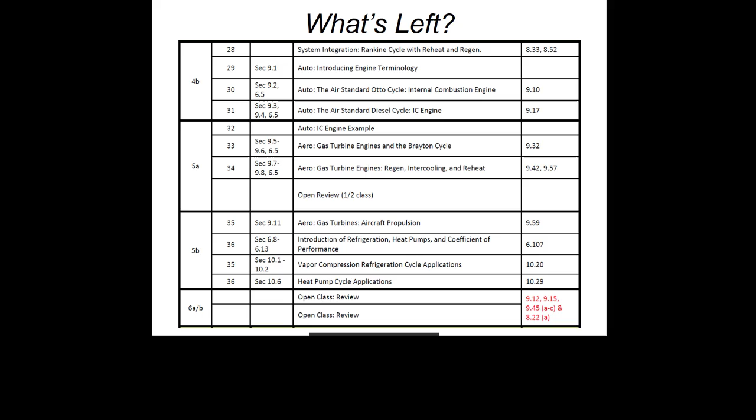So hopefully we'll get 1.5 or 2 of these evening sessions that are just problems like that. I think it'll be exciting for me—you get to play Stump the Chump over here. Again, the harder the question is, the better it is for all of us.

Now, in those open question-type problems—and hopefully even in the examples we do in class here, examples I've done before—you'll hopefully start to see the similarities in how I approach the problem, because I generally follow the same process, the same map. So the first thing I do when thinking about these cycle analysis problems—we've only really talked about Rankine cycles so far, but as we go to these different thermodynamic cycles, it's always going to be kind of the same things we're interested in.

Usually what we're trying to drive towards by the end is how do I characterize how well the cycle is doing. So there's some big characterization parameter. Now, all of these major characterization parameters, although sometimes we call it a thermal efficiency, sometimes we call it a coefficient of performance, but it's always going to be what's the energy benefit of the cycle divided by what's the energy cost of the cycle.

Now, when I look at the cycle, all of these thermodynamic cycles are a series of processes that are either run in series or, like that Rankine regeneration cycle, in parallel. So I got to ask myself, are these different processes open processes where mass is flowing through a system, stuff we're doing now on the second midterm, right? Or are they closed processes like we did on the first midterm?

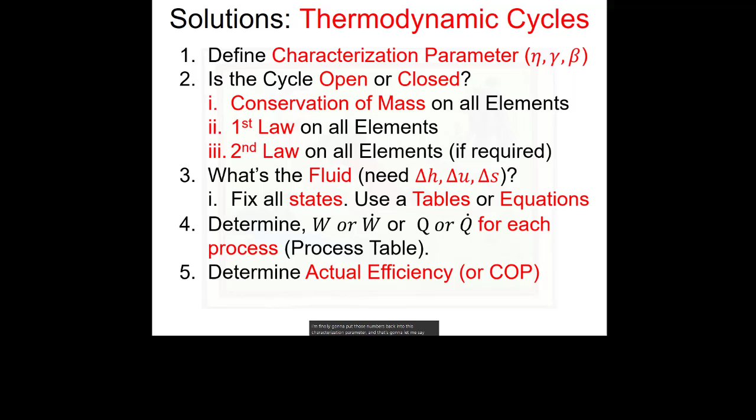Then I'm going to take the numbers that I have, I'm going to put them into the symbolic solutions that I had for the first and second law. That'll let me find things like work or power, heat or heat rates. And then I'm finally going to put those numbers back into this characterization parameter, and that's going to let me say something like, how efficient is my nuclear power plant?

And then sometimes I'll compare how efficient the real power plant is to how efficient the ideal version of the power plant is, by looking at that Carnot efficiency. Remember, that's related only to the hot and cold temperatures.

Now, so this is kind of my roadmap for how to do cycle analysis problems, but part of the reason that I like having a consistent process is because I don't like to memorize things. And even this is probably a little too much. It's like 5 points with a bunch of subpoints and stuff.

So really, I think for all of these cycles, there are 3 questions that I ask myself. The first is, how do I characterize the cycle? That's kind of 2 questions because it's basically asking me what's the energy benefit and what's the energy cost. So if it's a heat engine like a Rankine cycle, the energy benefit is mechanical power, or W dot net, and the energy cost is the heat that we have to put into the cycle.

The second question I ask myself is: is the system open or closed? Because that will let me start to develop the symbolic solutions I need to solve the problem. The last of the big 3 questions I ask myself is what's the fluid? Because if I know what the fluid is, that'll set out the rules I have for fixing the states, for finding things like H, U, S, and specific volume. The neat thing is that for all the different cycles we'll talk about, even though it's the same general process to solve the problems, the answers to these 3 questions have different permutations for each cycle we look at.

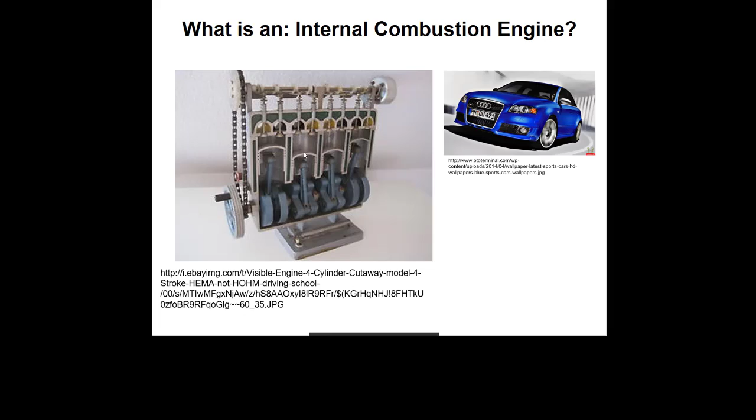Sometimes it's in a car that maybe you're driving back and forth to work, but sometimes it's in a big truck. Maybe we're learning more about trucks than we ever wanted to know, as we can't get anything from anywhere with regularity these days, or at least it feels that way, because trucks bring pretty much everything that we use everywhere that we are - it's part of the supply chain.

So when we think about it thermodynamically, what's the energy benefit of an automobile? Automobiles replaced horses, which replaced human power. The reason internal combustion engines are used for the most part is because they're producing mechanical power - you step down on the gas and the wheels turn. So you're getting that spinning shaft, which turns the wheel, which propels your vehicle forward or backward. We're trying to develop power or work with this internal combustion engine. In that way, it's kind of like a Rankine cycle, because the energy benefit of a Rankine cycle was to develop power.

Everybody is talking about the cost of an internal combustion engine these days. The biggest ongoing cost of an automobile is the cost to fuel it up. We put liquid gasoline into most automobiles, but not all these days. We do that because inside an internal combustion engine, we burn that fuel in a controlled way, and that gives us heat. Just like a Rankine cycle, this internal combustion engine trades heat, obtained from burning a fossil fuel, for mechanical work or power. So an internal combustion engine is still a heat engine.

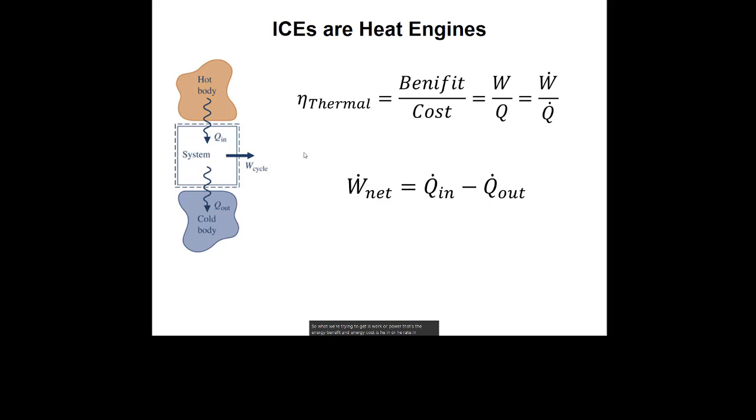When we think about our three big questions about cycles, the first one is, how do I characterize the cycle? An internal combustion engine is characterized the same way as a Rankine cycle, because it's a heat engine. What we're trying to get is work or power, that's the energy benefit. And the energy cost is heat in, or heat rate in, depending on whether we're talking about elapsed time or rate versions of these equations. So this part is just like a Rankine cycle.

But when we talk about our three big questions, that's where the similarities end. So what's the difference between this internal combustion engine, this piston cylinder assembly that keeps going around and around, and this Rankine cycle where water keeps going around and around, going through these phase changes? The similarity is that they're both heat engines, doing that same energy transaction of turning heat into mechanical work.

The first difference, and we'll see that for internal combustion engines this isn't exactly true, is the model we're going to use, the cartoon of the internal combustion engine to understand how it works. We'll assume that all the thermodynamic processes happening in this internal combustion engine are closed system processes, so that mass is not entering or leaving our system. That's different from the Rankine cycle, because the Rankine cycle is a bit like an assembly line.

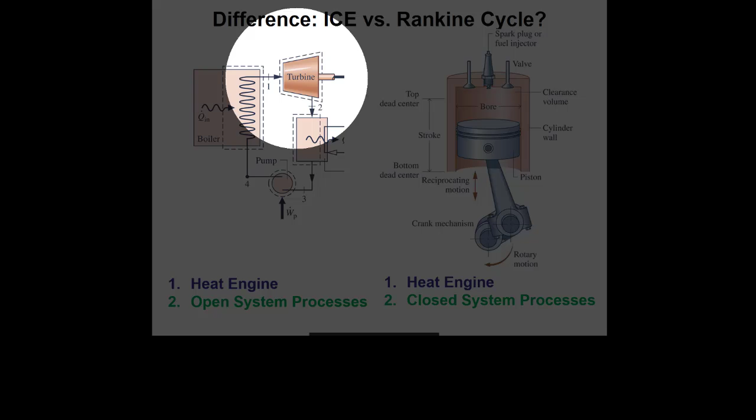We're developing power, we do that in the turbine. But then we go to the condenser, that's where we lose our heat. Then we go to the pump, that's where we put work in. Then we go to the boiler, that's where we put heat in. And we just keep doing it over and over again.

So in the internal combustion engines we'll talk about, they do those same four processes, but they all happen in the same place. The way we're going to model this engine is as if it's a closed system, that there's air inside this piston cylinder assembly. No new air comes in, no new air goes out. We'll see that's not exactly true, but it helps us solve problems with a pencil and paper.

That would give us our symbolic solutions for things like work and heat, which we need for our thermal efficiency. The next question is, how do I get numbers to put into those symbolic solutions? I need to know what the fluid is. For a Rankine cycle it was usually water, although you could get lower power systems using something like a refrigerant, something that's boiling and condensing. But for an internal combustion engine, and we'll see this isn't exactly true either, the assumption we're going to make is that the working fluid is air or some other ideal gas, but generally air.

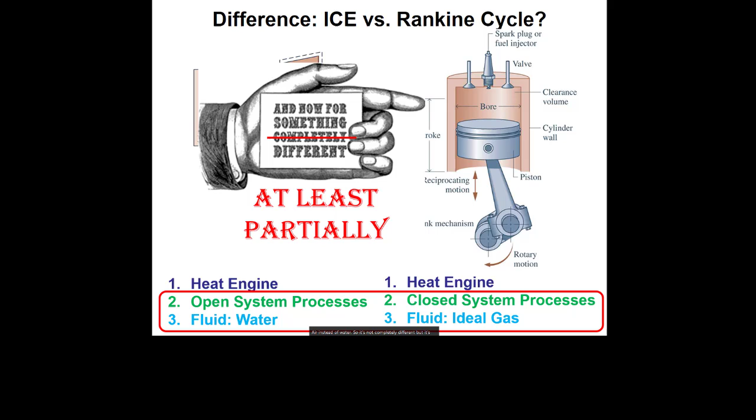So even though they're both heat engines, when we think about these three questions, this is as far away from a Rankine cycle as you could get and still be a heat engine. Because it's still a heat engine, we characterize it the same way. But the way we get symbolic solutions is different because we'll use a different version of the first law. And the way we fix the states will be different because it's air instead of water. So it's not completely different, but it's mostly different, or partially different, even though it's doing the same job.

So this is when we start to introduce terms. This is my very crude drawing of a piston cylinder assembly, my PowerPoint art on full display. The first thing is, this is the cylinder, this part here, and this is the piston. The piston is the part that goes up and down.

I like this animation, so you're going to get to see this one a bunch. If we think about the piston moving up and down, its lowest position we call bottom dead center, because you want your piston centered in your cylinder, and it's the bottom of the travel it has. The top position, the uppermost position of the piston, is top dead center. Notice that top dead center isn't having the top part of the piston flush with the top part of the cylinder, that there's some clearance between top dead center and the very top of our cylinder.

Now, the distance of travel, the space between top dead center and bottom dead center, that length we call the stroke or the stroke length. So sometimes people talk about two-stroke and four-stroke engines. That means to do a whole cycle, there's two strokes going up and down, or four strokes up, down, up, down. Don't worry if you don't get that yet, we'll talk about it a little bit. So the stroke or stroke length is the length between bottom dead center and top dead center.

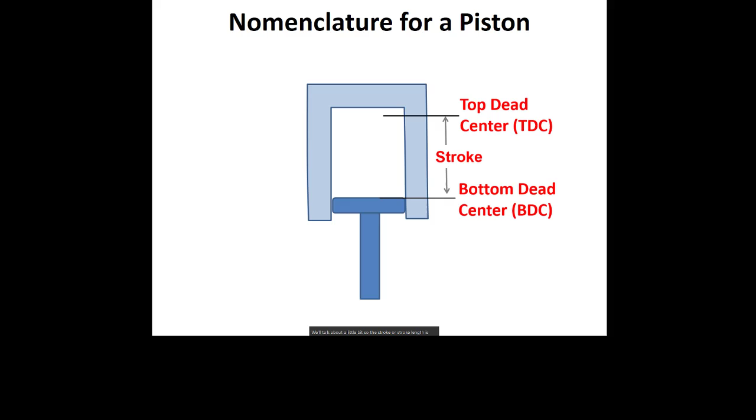We'll notice that this describes a volume, which we call the displacement volume. This cylinder is circular in cross section, so this displacement volume is a cylinder. If your exhaust valve is open and you pushed your piston up from bottom dead center to top dead center, this displacement volume is the volume of air that you would push out of your cylinder. That's the equivalent of the internal combustion engine breathing out, getting rid of that spent air fuel mixture inside the piston cylinder assembly.

But you've got to notice that just like top dead center isn't flush with the top of the cylinder, there's some volume here that's not displaced, that doesn't get pushed out of our piston cylinder assembly. So the displacement volume is not the entire volume at bottom dead center. It's the volume described by the stroke length and the diameter of the piston, or the cross-sectional area of the piston.

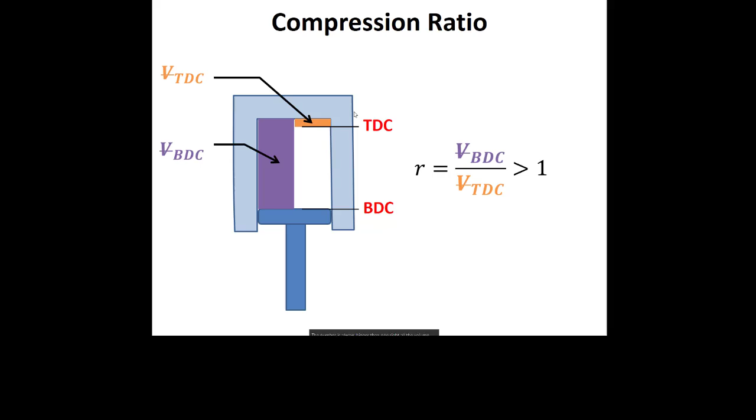Another thing that's important here is engine speed. Now, I know manual transmissions are kind of a dying breed, and as a mechanical engineer it hurts me to admit this, but I've never owned a car with a manual transmission. But it's really important to pay attention to what your engine speed is when you're changing gears manually.

It's kind of weird because engine speed isn't about how fast the piston is moving up and down, although it's kind of related to that. It's registered in RPM on your instrument cluster, because this piston is connected through a 4-bar linkage to a shaft that's spinning, and it's the rotational speed of that shaft telling you how fast your engine is going. Because the piston, as it moves up and down, has zero velocity at the top and bottom and some velocity in between. So instead, we talk about the angular velocity of the shaft driving this whole motion.

Now, because the units here are in rotations per minute, and if we're using the metric system we might want something like radians per second, we're going to need to know how to do some unit conversion.

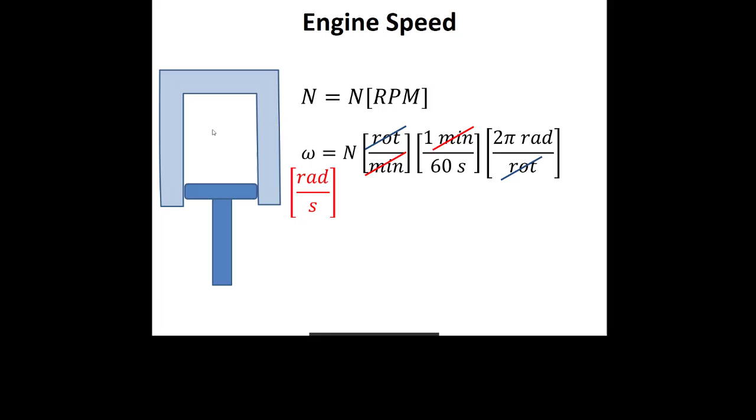So that's an important parameter when you're driving your vehicle. It's maybe not as important as the speedometer, because that's the one that determines whether or not you get a ticket. But knowing your engine speed can be important.

Now, depending on what your vehicle looks like, it might not even be a vehicle - you could have a 2-stroke engine or a 4-stroke engine. Remember we talked about stroke length? Here you can see the shaft - when we talk about rotations per minute, we're talking about how fast this shaft here is spinning. That tells us this rotational speed, and because this is a 4-bar, or what's it called?

Because it's a simple machine with a 4-bar. What did I just call it? A 4-bar mechanism? No, I can't even remember. Sometimes this is easier to describe when you're up at the board. We brought in a speaker once - I don't know if I've told you this story yet - but sometimes you feel like when you're standing at the board or giving a presentation, you're kind of in the zone of stupid because your brain just stops working every once in a while.

So this is a 4-bar linkage, and it's moving around, and this is kind of like a simple machine, a mechanical machine. Now, depending on the type of application your engine needs, it can be a 2-stroke engine or a 4-stroke engine. 2-stroke engines are usually kind of dirtier machines, but it's a cheaper kind of engine.

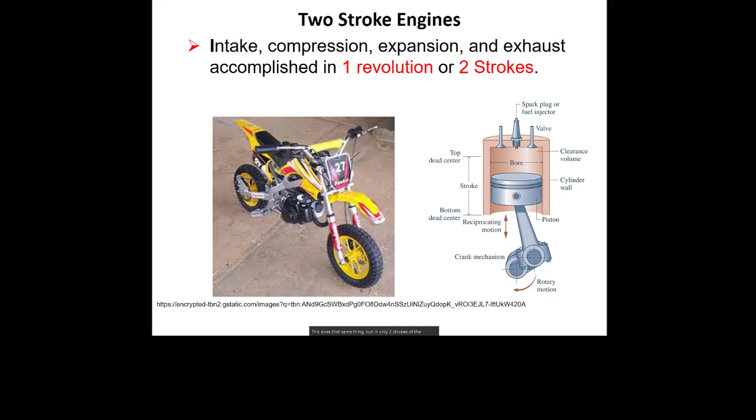But as your engine gets bigger - now you've got a motorcycle, or if you're driving like, I have a 4-cylinder Toyota Venza. I used to have a Toyota Corolla - they last forever, that's why I bought those cars. The Venza is like a station wagon, but you don't call it a station wagon anymore because that's not cool. But I'm starting to get rust on the bottom - my car's like 11 years old, and it's on the bottom of the lift gate, so I gotta get somebody to grind that out.

But as your power requirements get bigger, then you start to move into a 4-stroke engine, which is a more complicated machine, generally more expensive to build, but generally runs cleaner for these higher power applications.

Another way that we can characterize internal combustion engines is how we get the combustion - how are we burning the fuel? So in my 4-cylinder Toyota engines, there are spark plugs. What happens is, as there's this air-fuel mixture inside the piston cylinder assembly, and as that piston goes up, the pressure's going up, which means the temperature is going up, because PV is equal to MRT.

I got to start the fuel to burn because I want the fuel to burn, because that increases the temperature more, increases the pressure more, and makes that gas in the system want to push that piston down, which in turn is what's spinning that shaft.

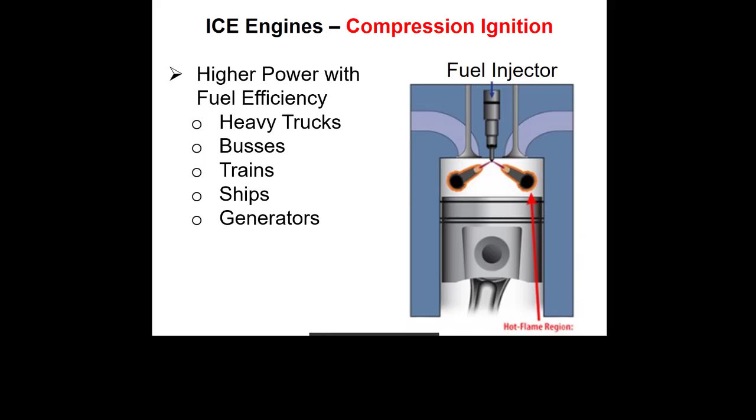So in North America, if you're not talking about something that uses compressed natural gas, or we're starting to move to electric now too, but usually heavy buses or heavy trucks, trains, a lot of ships - and if you have a diesel generator, because the power in Rochester is sometimes touch and go, so sometimes you need a generator to keep your fridge going if you lose power for a significant amount of time - these things often run on compression ignition.

And remember at the beginning I said, well, we make a lot of assumptions like it's always closed or it's always air. And part of the reason we make a lot of assumptions is because solving this would be really hard with pen and paper. So we're going to talk about, just like we did, what engineers do is we try to make things better using imperfect information, or cartoons of how the universe really works.

But here we'll talk about how a 4-stroke engine might run as it goes through a thermodynamic cycle. So we can think about the piston was at top dead center and now it's moving down to bottom dead center. So now we have, see, there's two valves here.

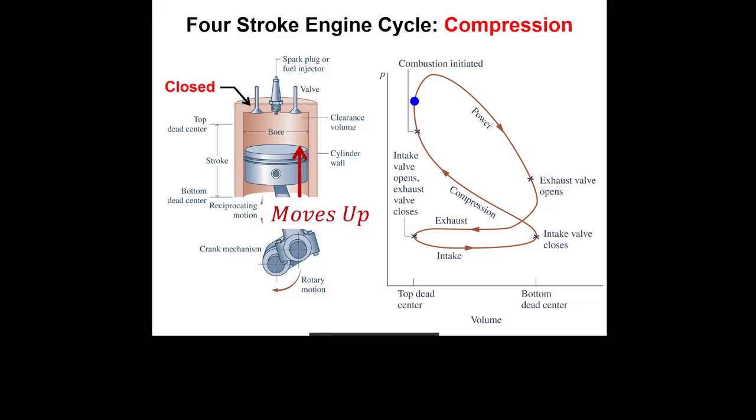What that means is my pressure goes up because I'm taking the same amount of air molecules and packing them into a smaller space. In real life, we don't just have air, we have this air-fuel mixture. As we're compressing, not only is the pressure going up, but the temperature is going up too.

And then we get to this magic spot where, if it's a spark ignition engine, that spark plug goes off, and now we get this rapid burn of the fuel in the air-fuel mixture. That drives the temperature up, drives the pressure up. And because the pressure is high, there's this big force on the piston that wants it to go down.

So that drives the piston down. Now this is our third stroke, the equivalent of the turbine inside the Rankine cycle. This is the whole reason we're running the internal combustion engine, to get to this stroke. This is the power stroke, where we're getting that mechanical power out. The whole rest of the cycle is just to get to this moment, so that we can drive that piston face down, produce force, and that's what's turning this shaft.

Ultimately it's doing a lot of things in your vehicle, but one of those things is making the wheels turn. But now, once we get back to bottom dead center again, because we burned the fuel in our air-fuel mixture, we converted some oxygen and some hydrocarbon fuel into carbon dioxide, probably some carbon monoxide, hopefully not that much, maybe some nitrous oxides too, hopefully not that much, but we consumed some oxygen. So we can't just keep running this with the same mass in the cylinder, because things don't burn when there's no oxygen.

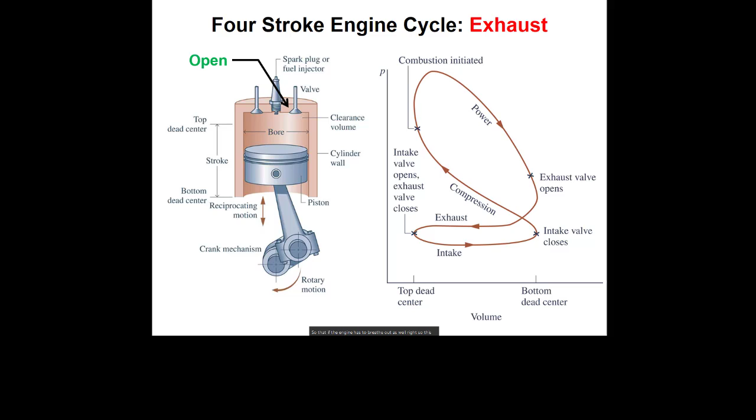The biggest volume. We open up our exhaust valve, and now the piston moves up, and as it moves up, because the exhaust valve is open, the pressure stays approximately constant because now there's some place for the air to go. We get rid of that exhaust gas, it goes out your tailpipe, before we start everything again. So now with that exhaust valve open and the piston moving up, we're pushing out this spent air-fuel mixture so that we can get back to where we started.

And then what would happen is after this exhaust valve closes, the intake valve opens, the piston moves down again, and we breathe fresh air back into the engine, and we just keep going around and around. And that's how a 4-stroke internal combustion engine works.

And the neat thing about something like this cutaway is a 4-cylinder engine. These cylinders are in line. Sometimes they'll talk about, especially as you get more cylinders, like a 6-cylinder engine, a V6, so the pistons aren't in line, but they're in a V shape. But here they're in line. And even though these two pistons are at the same place and these two pistons are at the same place, each cylinder here is in a different stroke.

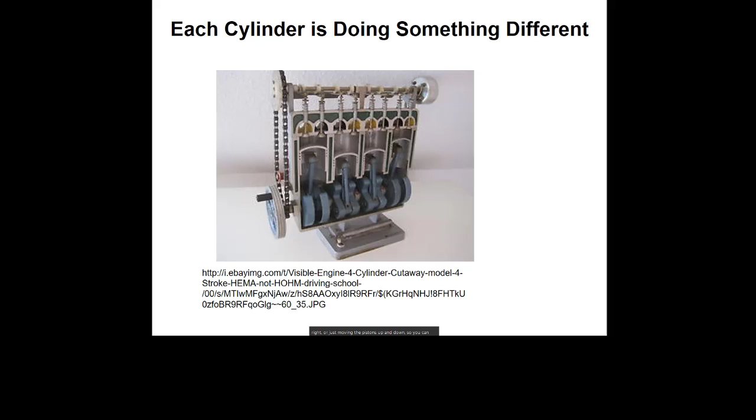Now, hopefully from this discussion, you get the idea that this is a pretty complicated thermodynamic cycle. If you were going to try to solve this thing without making a whole bunch of assumptions, I don't think you could do it with a pencil and paper, certainly not in the half hour we give you for an exam problem.

The cycle is not adiabatic, heat transfer is important here. There's combustion, which we don't talk about chemical reactions in this class. Because there's combustion, the actual composition of the gas is changing. So if you were thinking about it from an ideal gas law perspective, the specific gas constant of the gas is changing because it's a different gas, or a different composition of gases. Kinetic energy can be important here, even though we often neglect kinetic energy in our analyses so far.

It's not at steady state. It's transient, right? So the piston is always moving up and down. Things are changing with time. Sometimes it's an open system, which means we would sometimes use some version of the first law. And other times it's a closed system. When both of those valves are closed, then it's a closed system, and we'd use a different version of the first law for that.

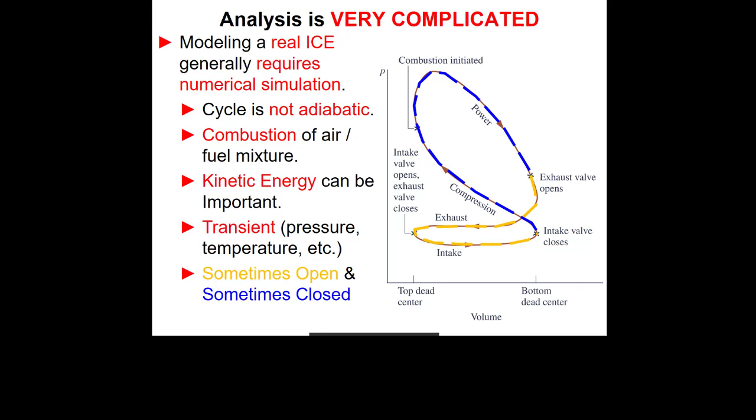So in order to get to a place where we can understand what's going on with these engines, we're going to have to make a lot of assumptions. Remember that each assumption kind of brings us more into a cartoon than real life, but that doesn't mean it's not useful, that we can't make something or make something better, even though the models are more simplistic than the real universe.

So we'll often do what we call an air standard analysis. That sort of is a broad term that encompasses a whole bunch of assumptions we're going to make here. We're going to neglect combustion. We're going to pretend that inside the cylinder is not this air-fuel mixture that sometimes is unspent, sometimes is spent, sometimes is going through the process of burning the fuel.

We're going to assume that the system is always closed. So instead of combustion, we're just going to talk about some heat coming in and some heat going out. We're going to say that the system is always closed. Remember that means delta E is equal to Q minus W instead of dE by dt is equal to a whole bunch of stuff.

We're going to say that all processes are ideal inside the engine, right? That it's reversible, a totally reversible process. Obviously this is not the case, but it still helps us get to usable information.

This sort of goes with the fact that we're neglecting combustion, but we're going to assume that the working fluid is always just air, that there's never any fuel in it, whether it's combusted or not, right?

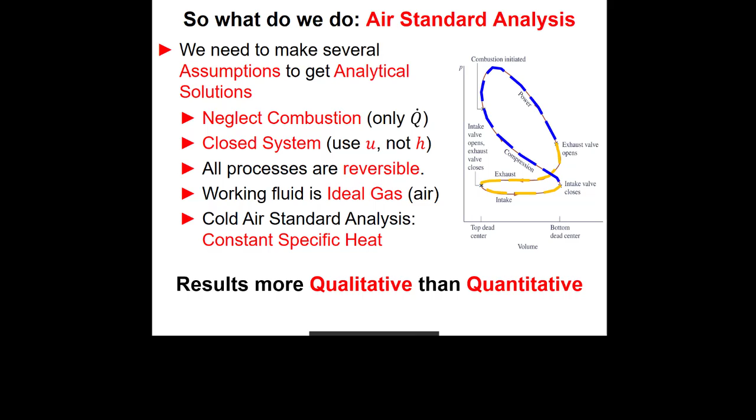Because of this, we can't necessarily have a lot of trust in the number that we get, but it's still going to tell us some really important things about what happens to the power or the efficiency of the engine if I do something like change the compression ratio. Remember, the compression ratio was the biggest volume divided by the smallest volume, or the volume at bottom dead center divided by the volume at top dead center. So we can still get some qualitative information about how to change the performance even by using this analysis, which is relatively simple. Remember, simple doesn't mean easy, just means less complicated than the real thing.

Another way that we can characterize an engine is by talking about its mean effective pressure. Remember how in the first third of the class we talked about how for closed systems, work can be calculated as the integral of PdV, but if the pressure was constant, then you'd pull it out and you'd get work is equal to some constant pressure times the change in volume.

So this is kind of where this idea for mean effective pressure comes from. You get the net work of one cycle in your system, and you divide it by your displacement volume, which again is the volume at bottom dead center minus the volume at top dead center. I mean, I guess the engine is probably at this pressure at some point, but it's not really supposed to represent some physical pressure inside the engine. It's just some way of comparing two different engines. So you know that if you have the same engine speed, but your engine has a higher mean effective pressure, that means you're going to get more net work or more power out of your engine.

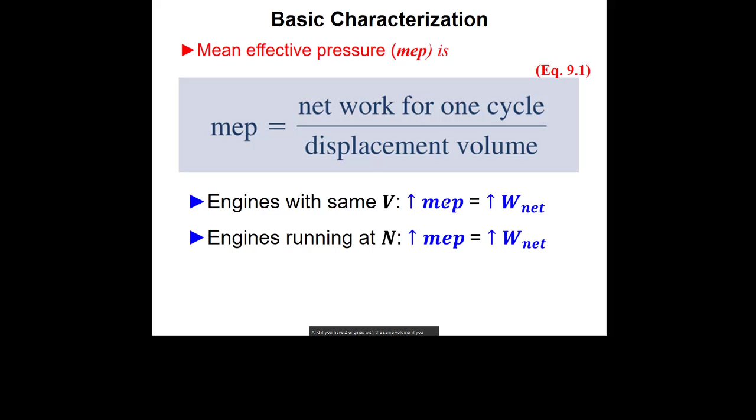If you're running at the same engine speed, then more mean effective pressure means more work or more power. And if you have two engines with the same volume, if you have a bigger mean effective pressure, then you get higher work out of that engine as well.

Still, when we talk about heat engines, which an internal combustion engine is, the way we characterize this, our first big question, is how do I characterize the cycle? Because it's a heat engine, we talk about thermal efficiency, and it's always energy benefit over energy cost. The energy benefit is work. The energy cost is heat in.

Or it's net power over heat rate in. I can think of the net power as the heat rate in minus the heat rate out, or I can think about the net work as heat in minus heat out. So how do I go about finding work and heat?

The answer is, as is so often the case in thermodynamics, use the first law. But because the system is closed, that's one of the assumptions we're making when running these internal combustion engine cycles, the system is always closed. That means I'm back to this picture of the universe, where the change in the energy in the system, or after I make assumptions about kinetic and potential energy, the change in the internal energy in the system is equal to the heat that comes in minus the work that goes out.

And if this was the first third of the class, I would tell you that we get heat using the first law, we get work by integrating P dV, and we get delta U by looking stuff up in the textbook.

Thermal efficiency can be, because these are closed systems, we're not often talking about powers and heat rates, we're back to talking about works and heats. I can talk about work out plus work in - remember, work out is positive, work in is negative - divided by heat in. Or I can divide all those things by mass and get the lowercase version of those variables. We'll talk about how to get powers and heat rates, and I can use those same equations.

So how do I find work and heat? The nice thing is, at least for one of the internal combustion engine cycles we'll talk about, we can assume that most of the processes are simple systems. Remember, simple doesn't mean easy, it means less complicated. In a simple system or simple process, thermodynamically, it means we either have heat or work, but not both. So if the process is adiabatic, then I can cancel out my heat transfer term.

And I'll get that work is the change in the internal energy, or work over mass is the change in the specific internal energy.

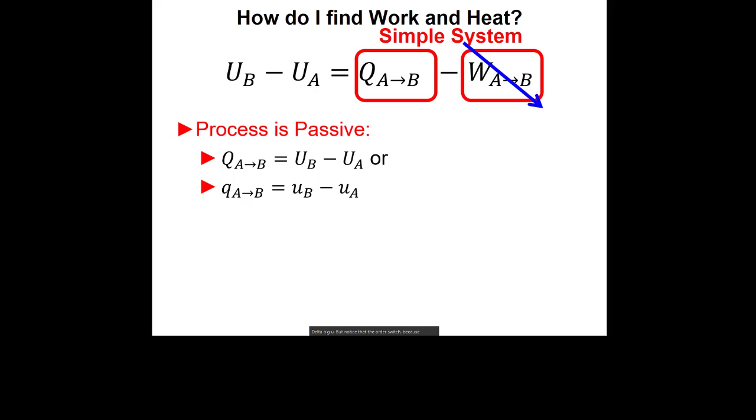Or if I'm going to say that a process is passive, one where I'm assuming there's heat transfer happening but not work, then heat transfer is equal to, again, delta big U, but notice the order switched because Q is positive and it's minus W in this equation. So I have U at the end minus U at the beginning.

Now we get to this point when I have these equations where I've got to ask myself, what's the fluid? Because now I need numbers for delta U. And the fluid, when we're talking about internal combustion engines, is going to be air, or some other ideal gas, but you're driving your car around in air, so the intake is air and the exhaust is mostly air.

So that opens up for us the ideal gas law. Sometimes, particularly if we're trying to find mass, we're going to have to use pressure times volume is equal to mass times the specific gas constant, which is the universal gas constant divided by the molar mass, times the temperature, not a delta T, so that's Kelvin or Rankine. If I'm trying to find the mass, I'm stuck using that equation. Remember, the units are going to be tricky when I do that.

But if I'm moving between states, I will often prefer to use PV over T at state 1 is equal to M times R, but it's a closed system, so the mass is constant, and I assume there's no combustion, so the specific gas constant stays the same. So PV over T at state 1 is going to be equal to PV over T at state 2. Again, remember those temperatures have to be absolute temperatures. Really, anytime you're dealing with an ideal gas law problem, just reflexively turn those temperatures into Kelvin or Rankine.

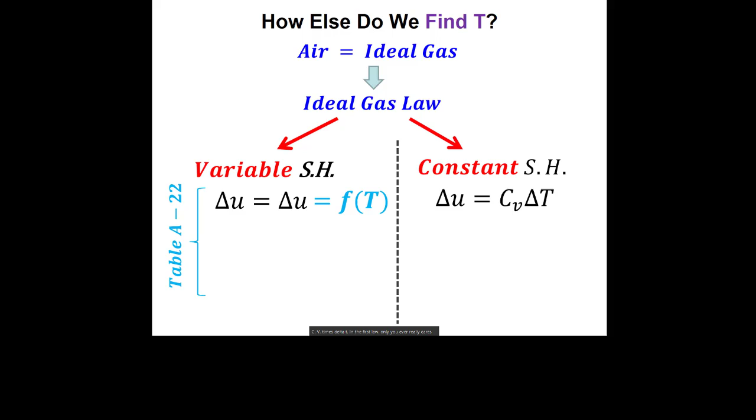If it's constant specific heat, I'll never actually find the individual specific internal energies, which is fine because I don't really care what they are, since I'm going to assume that delta U is equal to CV times delta T. The first law only ever really cares about the change in internal energy or specific internal energy.

Now, this is going to be true for any cycle where the working fluid is an ideal gas. We need to know which of our processes are isentropic. Those are going to be the ones where there's no heat transfer and it's ideal. The nice thing about internal combustion engine problems is every process is ideal, so we're really just looking for ones where there's no heat transfer and only work. Those are going to be isentropic.

Now, we talked a little bit about using variable specific heat to fix the states, that I only need one piece of information on that table. We'll do an example like this today. If I can find a VR value or a T value, then I can fix the state. So the ratio of volumes is going to be equal to the ratio of this VR value that's on table A22.

But if it's constant specific heat and it's isentropic, I'm looking for some equation that has K in the exponent. You'll notice for both of these isentropic relationships, we're using the relationships that have volumes in them. That's because these are closed systems, and in closed systems, we typically know volume ratios.

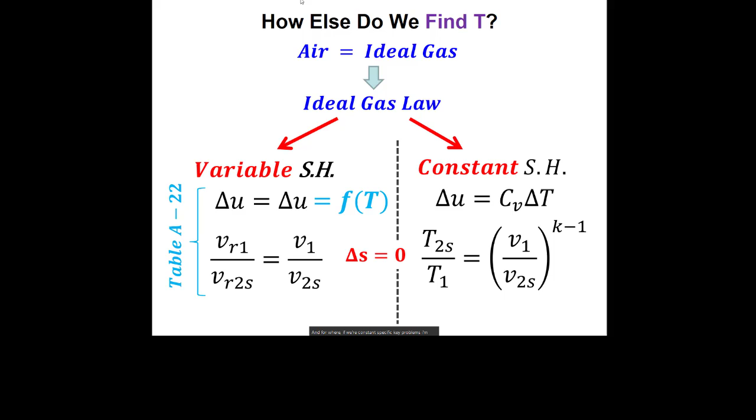So I like the equation sheet that I made. I think you can still make your own equation sheet, but bring mine too. So there's three different ways we're going to model internal combustion engines.

Well, really only two, because we don't really do dual cycles. The difference between an Otto cycle, which we'll learn first—I think it's the less complicated version—and the diesel cycle, which we'll learn second and is more complicated, we'll try to do both today. It's the assumption we make when we're adding heat that's different. An Otto cycle is more like a spark ignition engine. We're going to assume that when we add heat, it happens almost instantaneously, so fast that the volume doesn't change.

So Otto cycles happen at constant volume. Diesel cycles, the assumption that we make when we're adding heat is that they happen at constant pressure. And we'll see that makes it a little bit harder to solve diesel problems.

And then in the textbook, it talks about dual cycle problems. This is more complicated, which probably means more realistic. Usually as you increase complexity, you get closer to the real life application. Here we assume that the heat addition process can be broken down into two parts, one that's constant volume and one that's constant pressure. But we're going to focus on Otto and diesel cycles for the remainder of the day, and that's what we'll talk about for internal combustion engines.

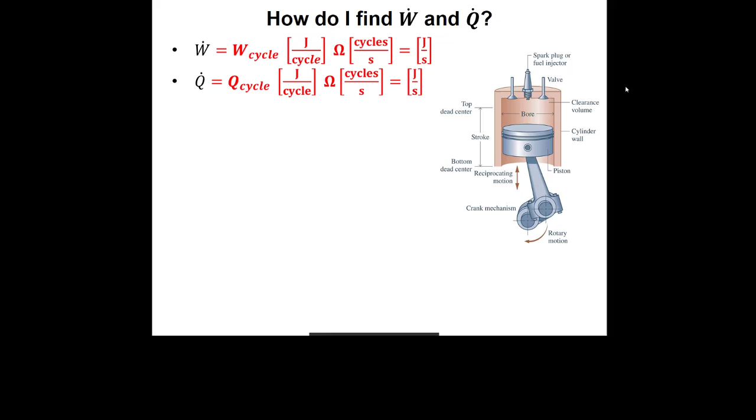Same thing if I wanted the heat rate, I would find heat per cycle multiplied by cycles per second, and that would give me joules per second. But how do I change engine speed, which is in rotations per minute, into this cycles per second value?

The thing that I need to know is not just the engine speed, but whether it's a 2-stroke or a 4-stroke engine. Because for every rotation of our crankshaft, we get 2 strokes. If we started at bottom dead center, the first half rotation would get us to top dead center, and the second half rotation would get us back to bottom dead center. So we're back to the same position in the same phase - not thermodynamically, but phase meaning same direction.

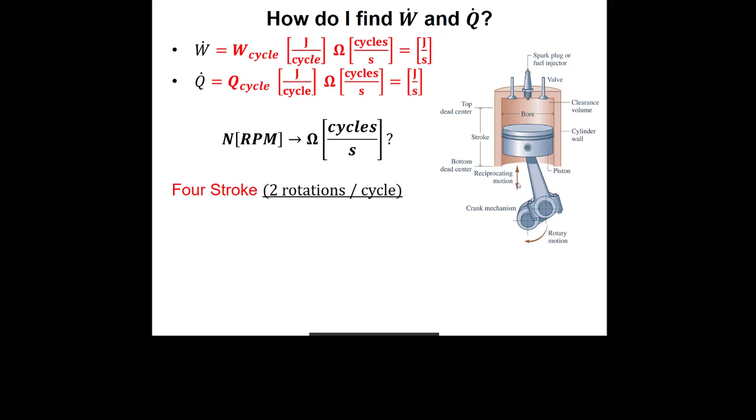So a 4-stroke engine, to get 4 strokes to go up, down, I need 2 rotations per cycle. So if I'm trying to find out how many cycles per second I have in a 4-stroke engine, I have to take my rotations per minute, turn that into rotations per second, and then divide the number of cycles I have by 2 rotations, because it takes 2 full rotations to get 1 cycle in a 4-stroke engine - to go 4 strokes, I need 2 rotations of that crankshaft.

In a 2-stroke engine, I do the whole cycle in only 2 strokes, so I only need 1 rotation. So my rotations per minute are also my cycles per minute. If I just multiply by 1 minute per 60 seconds, then I get my cycles per second. So it's important when you're trying to get to power, you're going to need your rotations per minute, but you have to know, is it a 4-stroke engine or a 2-stroke engine?

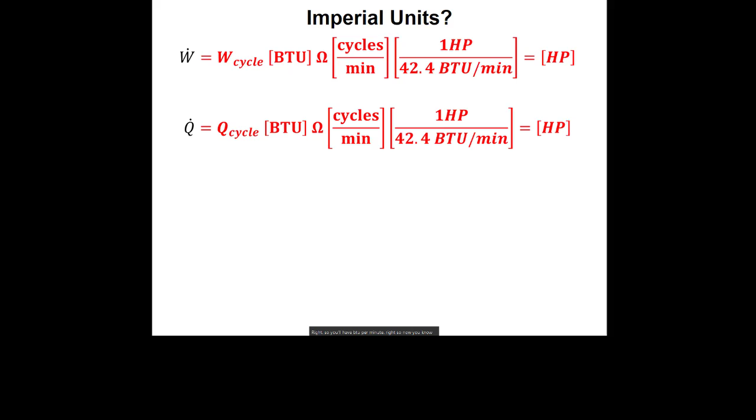It's not obvious, but as with everything else, it's a little more complicated if you want your power in imperial units, because nothing's ever an easy conversion. Like you saw on that equation sheet, 1 horsepower is 42.4 BTU per minute. When you find delta U in your textbook, it's going to be in BTU per kilogram. You multiply by the mass, you get BTU. Then you're going to have some rotations per minute, so you'll have BTU per minute. So you know that 1 horsepower is 42.4 BTU per minute. It's important to know that conversion factor, which is on the equation sheet.

But it's also important to know whether it's a 4-stroke engine, which needs 2 rotations per cycle, or a 2-stroke engine, where it's 1 rotation per cycle.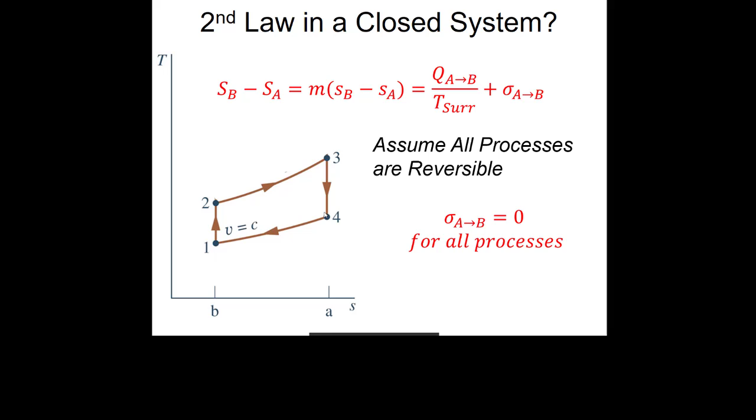Here, that's going to be process 1 to 2, which is compression, and 3 to 4, which is expansion or the power stroke - those are the isentropic processes. And the isentropic processes are the key to fixing the states.

So I know the first part - this is kind of all background stuff. I think it'll make a bit more sense when we start to do examples, which we will do in the next part of the lecture. Does anybody have questions before we take a break?

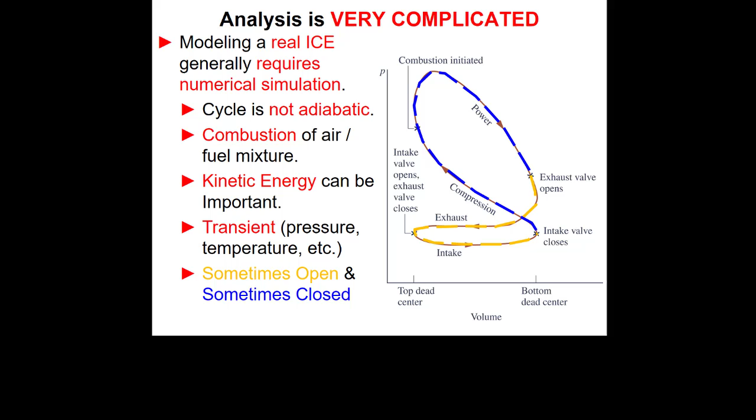Hopefully we got at least a little bit of background about how these things work. But now we're going to start talking about how we actually solve problems. Because when you look at a cycle and it looks like this, you can't actually solve it without a computer. So instead, we start to make a bunch of assumptions. We're going to neglect combustion, say that it's always a closed system, and say that every process is ideal - so any process with no heat transfer is also isentropic.

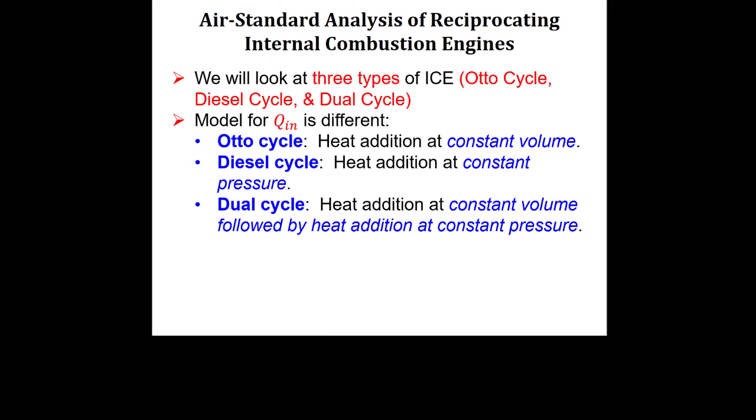We're going to say that the working fluid is only air, and that it exists at constant specific heat. Because we've made all these assumptions, we're stepping further and further away from reality, so we can qualitatively trust what's going on - if I change a certain variable, how does the engine performance change. But we have less trust in the actual number. That's okay though, because sometimes we just want to see what changes to the engine can make it run better. We're going to look at different engine types, and it's the assumption we make while adding heat that defines which engine type we're looking at. The first one we're going to look at is the Otto cycle.

So in the Otto cycle, what makes an Otto cycle is that the assumption we make while adding heat, in the process from 2 to 3, is that it happens at constant volume. Every process is going to be ideal or reversible. So just like our basic version of the Rankine cycle, there are 4 different processes inside our Otto cycle.

The nice thing about Otto cycles and diesel cycles is they just are what they are. They don't get any more complicated. There's no regenerative Otto cycle that we're going to learn about. So it's 4 different processes.

The first is the compression stroke, or at least modeling the compression stroke. So an isentropic compression, the volume gets smaller. And because it's a closed system, that means we're putting work into the system.

Our second process, what makes an Otto cycle, is that we assume the heat addition happens at constant volume. So on our PV diagram, we have a vertical line. And for these ideal gas cycles, or these internal combustion engine cycles,

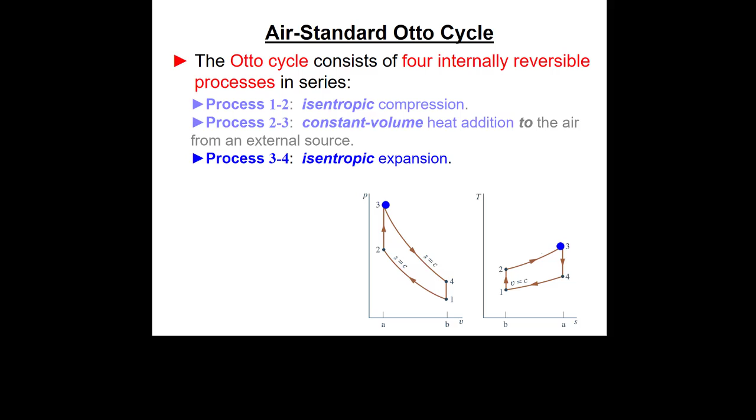3 to 4, that's the power stroke, the whole reason we're doing this. This is the equivalent of the turbine in the Rankine cycle. This is our isentropic expansion, so it's expansion because the volume is getting bigger, because the air at high pressure is pushing that piston down. As it does, the pressure gets lower as the volume increases.

And then we have constant volume heat rejection, or heat transfer from the air in the system to the outside world. That's how we're modeling the exhaust. So this is what an Otto cycle is. You're going to have to know, for all of these different cycles that we talk about, what a TS diagram looks like and what a PV diagram looks like.

A sample multiple choice question that you won't get on the second midterm, but could get on the final, is: which of these PV diagrams is associated with an Otto cycle? And then you have to pick the right one.

So you'll notice about the Otto cycle that there are only 2 volumes: there's the big volume, and there's the small volume. The volume at 1 is equal to the volume at 4, and the volume at 2 is equal to the volume at 3. Remember, our compression ratio is always the volume at bottom dead center, the big volume, divided by the smallest volume, which is the volume at top dead center.

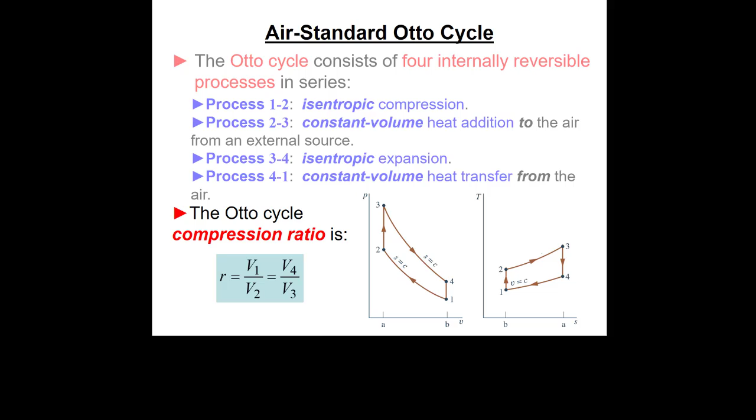So here we can have V1 over V2, or V4 over V3, or really any combination of the big volume, that's V1 or V4, divided by the small volume, which is V2 or V3.

Now, I showed you a cartoon basically of how a 4-stroke engine works, but remember, this model is not exactly how reality works. Because it's telling us that we put work in with the compression stroke. That's real, that happens. But then, instead of having actual combustion, we say the piston just kind of dwells there for a little bit, and we add heat. And then eventually it goes back down and we develop work. And then we reject some heat.

So I drew out this sort of comic strip to show you that it's not exactly how it really happens. But that's okay because this is a model, a cartoon representation that helps us understand how these things work.

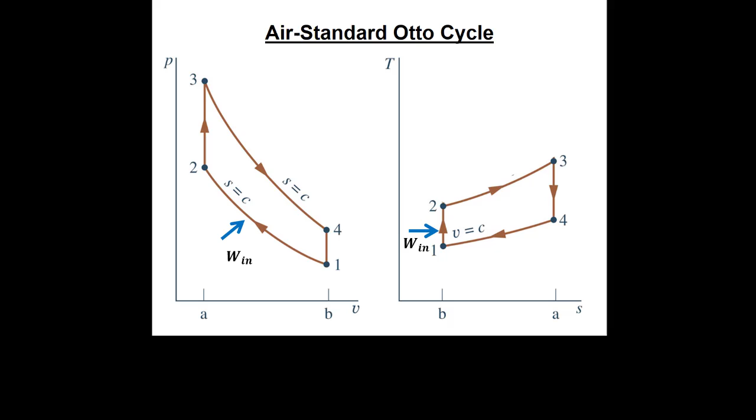So in the Otto cycle, there are 4 processes, and they're the same 4 processes basically that happen in a Rankine cycle, but in a different order. There's the compression stroke, that's where we're putting work in, that's like the pump. Then there's heat addition, which happens at constant volume in an Otto cycle, that's like the boiler in a Rankine cycle. Then there's the power stroke or the isentropic expansion, that's like the turbine.

And then there's the heat rejection, which is like the condenser. So it's still the same basic processes, but here, instead of it being like an assembly line where each process happens in a different location, these things are all happening in the same place. And because it's a constant mass, we're going to use a different version of the first law. And because the fluid is different, we're going to fix the states differently too.

There are two processes here that we'll assume are passive, meaning the work is 0. That's my process from 2 to 3 and from 4 to 1. They're my two processes where the entropy is changing. They're also my two processes in my Otto cycle where the volume stays constant. So if I want the change in U...

If it's constant specific heat, then it's CV times delta T. And I can find that CV value, the specific heat at constant volume, on table A20 or A20E, depending on whether I'm using metric or English or imperial units. Or I can look it up. If I'm looking it up on A22, then I'm not using this equation either. Then I'm finding the actual values for U.

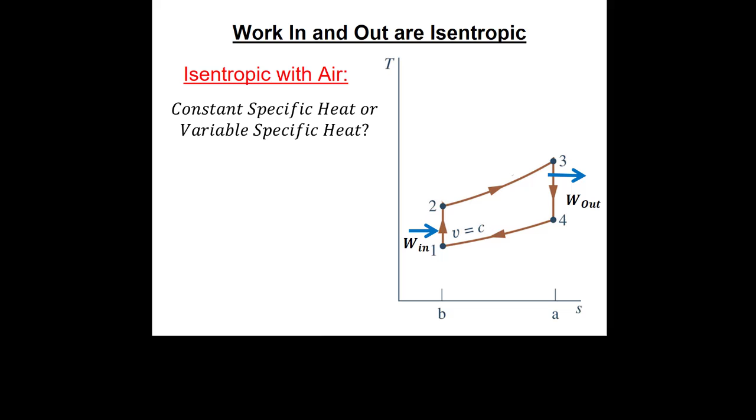Isentropic for air - those are the processes that have no heat transfer. So those are the ones where I'm putting work in or I'm getting work out. And again, if it's constant specific heat, then I'm going to say delta U is CV times delta T. And if it's variable specific heat, I'm going to find the actual values for U.

It's important to know where the isentropic processes are. And here, when I'm hunting for isentropic processes, I need to do this particularly for any cycle with air as the working fluid or some ideal gas as the working fluid. I'm looking for processes that have no heat transfer.

If it's a constant specific heat problem, I'm going to use the fact that it's isentropic to open up the door to one of these equations. So if it's constant specific heat, I'm looking for an equation with K in the exponent. Because it's a closed system problem, I'm going to look for the one that has a volume ratio, because these internal combustion engines, I know the compression ratio, which is a ratio of volumes. So that's where I'm going to use constant specific heat.

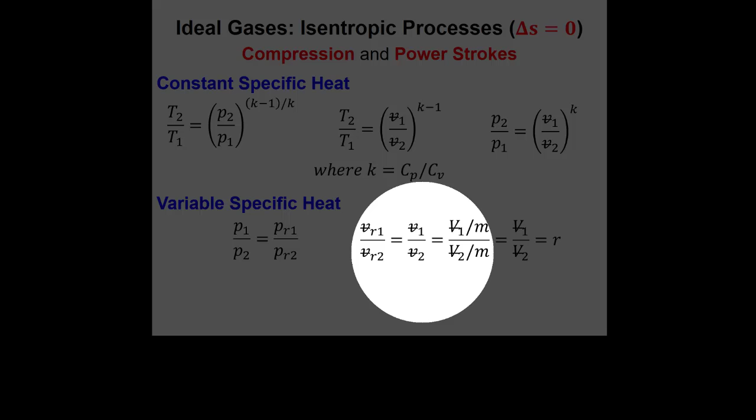But for variable specific heat, I'm looking for something I can get off A22. So I'm looking for PRs and VRs. But again, because I know a volume ratio here, I'm going to use VR over VR is equal to V over V, which is the same as the specific volume divided by the specific volume. But because the mass is constant, that's the same as the volume over the volume, which is my compression ratio, or maybe the inverse of my compression ratio, depending on how I'm going through the process.

So when I'm looking at these processes, the nice thing about the Otto cycle is I have only simple processes, so I'm never going to have to take the integral of PDV. I'll assume that all these things are steady state. I guess it doesn't really matter - what I mean by steady state is it's like you're driving down the highway on cruise control, so things like the RPM of the engine aren't changing, or the power output.

We'll say that it's a closed system. That gives us this equation. We're going to neglect kinetic and potential energies. And then each process is either adiabatic or it's passive. So if it's the compression or the power stroke, then it's adiabatic and I'm solving for work. If I'm adding heat or rejecting heat, then it's passive and I'm solving for heat.

Because it's an internal combustion engine, I'll say all these processes are ideal. What that means is that if it's adiabatic, it's also isentropic, which lets me use those VR equations, or the equations with K in the exponent. I hope those hiccups stop - otherwise it's going to be an uncomfortable rest of the class for me.

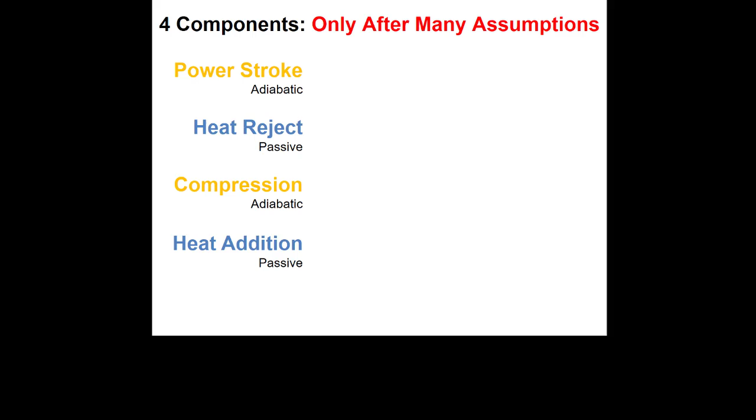And after we do that, the equations we will get for the Otto cycle are: if I'm looking for the work produced in my power stroke, it's going to be the mass times U at the beginning minus U at the end. That looks, if I squint, kind of like when we had power from a turbine and it was W dot is equal to M dot times H in minus H out. But because this is the closed version of the first law, we get rid of the dots, and it's not H's, it's U's, and it's not in and out, it's at the beginning and at the end.

If I'm looking for a heat transfer term, it's going to be mass times U at the end minus U at the beginning. Compression is where we're looking for work.

So it's M times U at the beginning minus U at the end. And if it's heat addition, it's going to be M times U at the end minus U at the beginning. But you don't have to memorize any of these equations because you know that delta E is equal to Q minus W, and you can get these equations by making some assumptions. These equations are here in the notes, and they're kind of similar to those 4-component Rankine cycle equations.

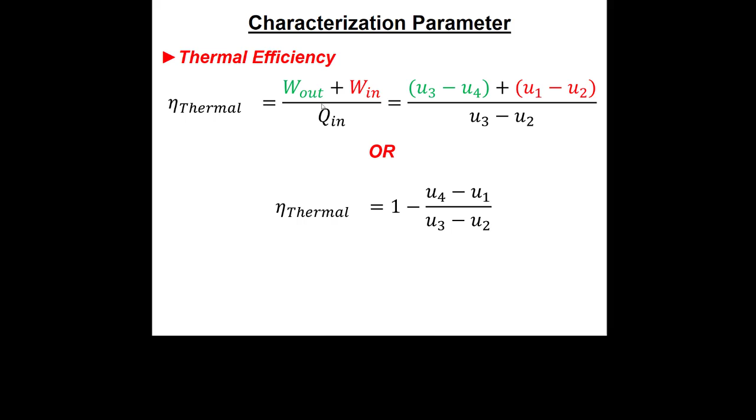Just like we can talk about our net work over heat in, we can also talk about net heat over heat in, and thankfully, we get the same equation, because those things are the same thing. I don't like to memorize things, but you could memorize this equation as the thermal efficiency for Otto cycles. Personally, I wouldn't do that. I would just get to it myself, because on an exam, I'm probably going to ask you to do it step-by-step so you demonstrate your understanding. But knowing what the answer looks like makes finding the path a little bit easier.

We know that all of these processes are ideal. The neat thing about ideal processes is that just like the integral of P, we can look at the area inside of our TS diagram, and that's going to tell us our net heat. Remember how work was the integral of PdV? Heat transfer is the integral of TdS. We just don't really talk about it too much.

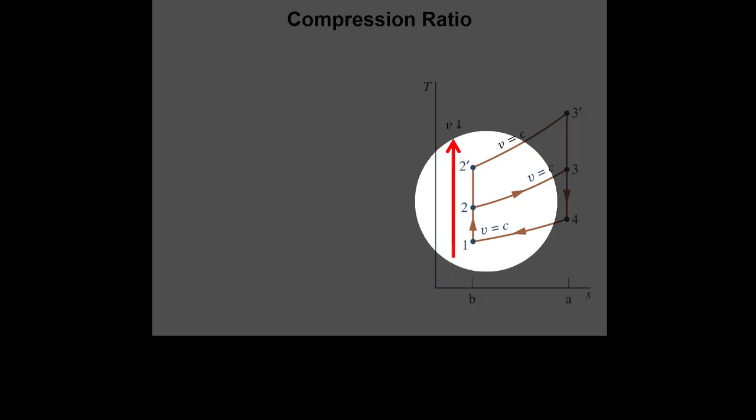So if I have a small compression ratio, that's going from 1 to 2 to 3 to 4. But if I have a large compression ratio, then I get a bigger change in volume, and I go from 1 to 2 prime to 3 prime to 4.

Now I can see very clearly here that increasing my compression ratio made the area inside my cycle larger. So as my compression ratio gets bigger, that means the area on my TS diagram gets bigger, which means my net heat is more, which typically means I'm burning more fuel. But net heat equals net work, so I'm also getting more work out. And it turns out that as I increase my compression ratio, the efficiency goes up.

That's a neat thing to know, that if you have the same or similar engines, but you increase the compression ratio, then you get more work, or more power too, provided you're at the same speed.

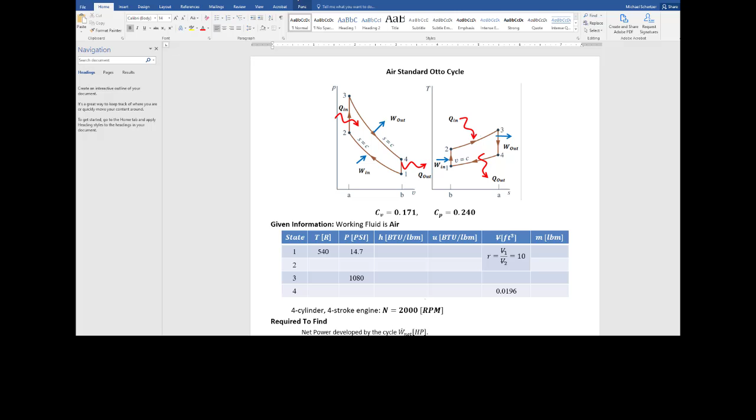So I think that means it's time for us to go through an Otto cycle example, because ultimately that's what we're going to get tested on, is how do we do these problems. So here we have an Otto cycle problem, and it's giving us some information, like it tells us enough to fix information at state 1, some pressure at state 3, and it asks us to find the net power in horsepower.

It also tells us, for anytime I think power, I got to think what's going on with the stroke. So this is a 4-stroke engine. And then it says, compare my answer for variable and constant specific heat.

So the first thing that I want to know is what contributes to net power. It's my two processes here, from 1 to 2 where I'm putting work in, and from 3 to 4 where I'm getting work out. So before I get net power, I want to find net work. That's going to be the work from process 1 to 2, plus, which I expect to be negative, plus the work from process 3 to 4, which I expect to be positive.

Okay, so how do I find these things? I need my first law. The first assumption that I have is that the system is closed.

Because the system is closed, I know that delta E, or here I'll even write it this way so I don't get my deltas confused. So this is going to be E at the end minus E at the beginning is equal to Q from the beginning to the end minus W from the beginning to the end. But here I'm also going to neglect changes in kinetic and potential, and spring energies too, those things are all about 0. So this becomes the mass times U at the end minus U at the beginning.

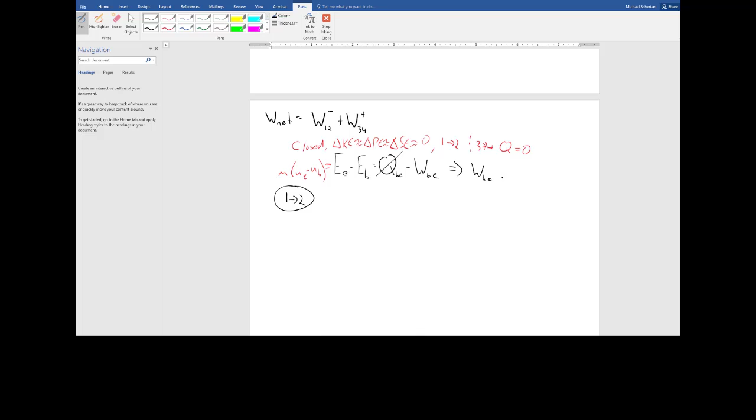So for process 1 to 2, I know, or the assumption I'm going to make, because these are simple processes, from 1 to 2 and 3 to 4, when I'm interested in work, heat transfer goes to 0. That means I don't care about heat. So from here, I'm going to see that work from beginning to end is equal to the negative of this, which is going to be the mass times U at the beginning minus U at the end.

So from 1 to 2, work from 1 to 2 is going to be the mass times U at the beginning, that's 1, minus U at the end, is 2. From 2 to 3... this is 3 to 4, I'm sorry. 2 to 3 is a heat transfer process. This should be 3 to 4. So this is going to be mass times U3 minus U4.

So my net work, which is really the amount of work per cycle, and I can look here, this is in imperial units, so this is going to be in BTU per cycle, is going to be equal to, it's the same mass everywhere, times U1 minus U2 plus U3 minus U4, and I expect the first term to be negative and the second to be positive.

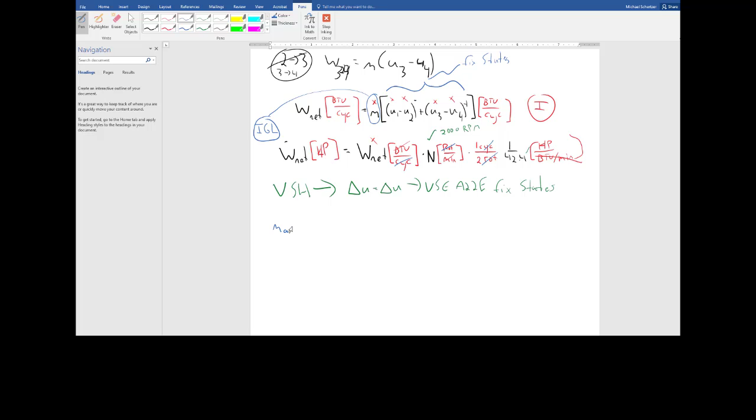So because I'm going to assume that this is an ideal gas, then I know that pressure times volume, PV, is equal to M times R times T. Let's see what the problem tells us. It told us CP and CV. It didn't tell us R. So here I would have to get R bar.

R bar we're going to get from a table, from the first page here. I think I got the website open, so I'll show you where I would get R bar from. So here I'd go to course information, thermal reference tables - it's always going to be on this first sheet. I'm looking for R bar.

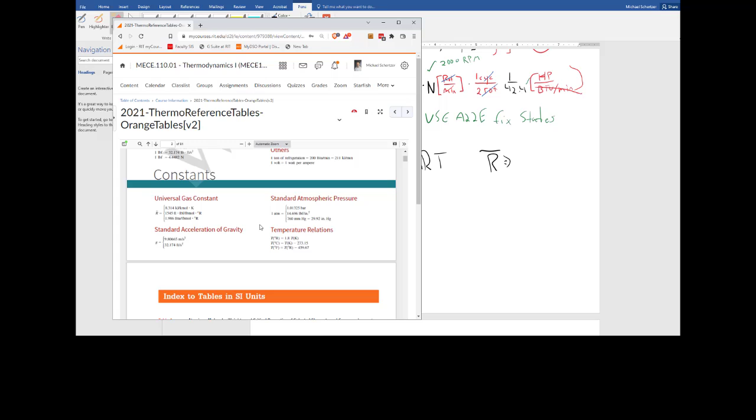I've got 2 choices here, in foot-pounds per pound mole or in BTU per pound mole. I'm going to take this number in BTU per pound mole, I'm going to call it 2 BTU per pound mole Rankine.

And then this is going to be divided by the molar mass. The molar mass I'm going to find, but first I got to go through - they take all the color out, they make the English units more drab, because it sucks the fun out of everything. So this is going to be 28.97, and the units on this should be something about pounds mole per pound mass, or the other way around - so this is pound mass per pound mole.

So when I divide these 2 things together, what's going to happen is that the pound mole in the numerator is going to cancel the pound mole in the denominator. And I'm going to get that R is equal to 2 divided by 28.97, which is 0.07. And this is going to be BTU per pound mass degree Rankine. So this is going to be true for any one of these states.

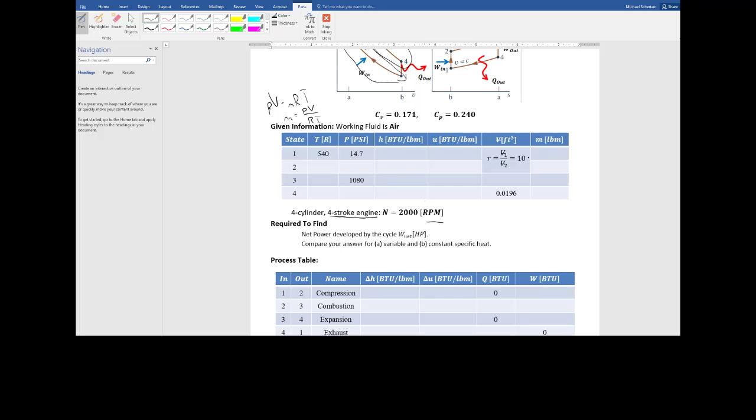But here's the trick: we actually know V1, because if I look on my diagram, V1 is equal to V4. So they told me V4 down here. I'm going to see if I can grab this table. So here we know the mass. I'm going to evaluate all this at state 1 because state 1 is the one that I know the most about. The mass is going to be P1 V1 over R T1.

P1 is 14.7 PSI, so pound force per inches squared. V1 is this same volume here, 0.02 feet cubed. I already see there's going to be unit problems, but I knew that anyway because it's an imperial problem. Divided by R, which is 0.07 BTU per pound mass Rankine. My temperature, which is already in Rankine, so they were nice to me.

540 Rankine. So now I'm going to have to take this numerator and get rid of the inches squared, so I'm going to say 12 squared inches squared per foot squared. This is going to give me foot pounds, but I want BTU. So then I also have to take 1 BTU per 778 foot pounds force. You can see how you can get wildly incorrect answers here if you're not multiplying by 12 squared or dividing by 778 - massively different answers.

So here, as I go from 1 to 2, if I look here, this is a process with no heat transfer, which means it's isentropic. So because that's true, now I can use my delta S equal to 0 equations, but because it's variable specific heat, I'm not looking for one with K in the exponent. Instead, I'm looking for one that's going to be VR2 over VR1 is equal to either little v2 over little v1 or big V2 over big V1.

Now, when I think about this, if I drew my PV diagram, this is state 1, 2, 3, 4. So this is going to be my little volume over my big volume. So this is 1 over R.

In this problem, they told me that V1 over V2 is 10, but now this is V2 over V1, so that's 1 over 10, or little VR2 equals VR1 over 10, which is going to be 14.432.

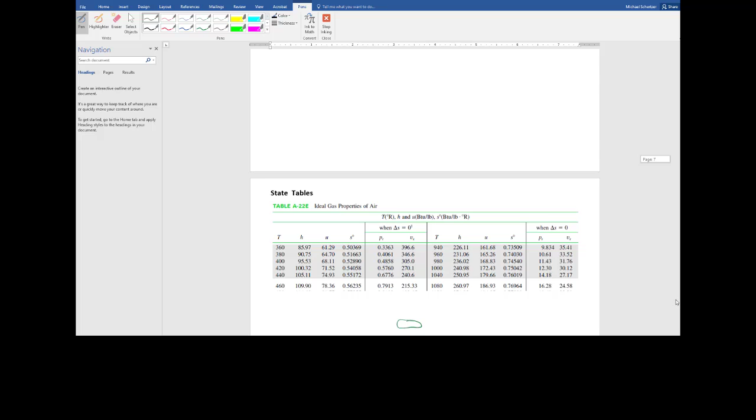So what did I do wrong? Oh, yeah, thank you. P1 is not P2.

So now I got to go back to this equation, right, and also use this. So now I can say that P1 V1 over T1 is equal to P2 V2 over T2. And I can get that P2 is equal to P1 times V1 over V2 times T2 over T1.

V1 over V2 is 10, right? So this is 10. T2 over T1 is 1320 divided by, did they give us T1? I think they did. 540.

P1 was 14.7. This is going to be a better number. So this is going to be 14.7 times 10 times 1320 divided by 540. So P2 is 359.3.

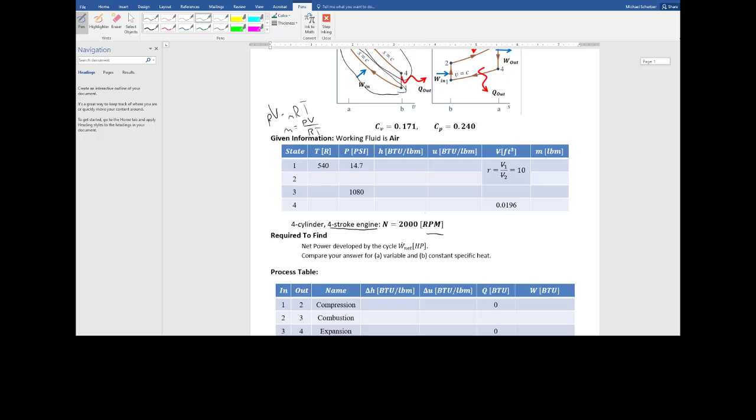So now this means that I can use my isentropic equations because it's variable specific heat. Then I'm going to say VR4, because that's the one I'm trying to find, over VR3 is equal to V4 over V3.

But now I go back and I look to try to find V4 and V3, right? V4 is my small volume. V3 is my big volume. So 4 is the small, no, 4 is the big volume, I'm sorry. So 4 over 3 should be the same as 1 over 2, which is 10.

So this is going to be R. So now from here, VR4 would be equal to 10 times VR3. And then I would go to my table A22E, and now this would be like state 2, because here I'm going to find VR4 and then work to the left and find U4.

And now we would go back to our sort of initial equations. And we'd say, yes, I found the mass from the ideal gas law. I found U1, U2, U3, and U4. That means I know W net. So then I can put it into this equation, and I can get an expression for horsepower.

Now, if the only difference, the difference is if this was constant specific heat, then the delta U's would become CV times delta T. And instead of using VR over VR is equal to V over V, I'd use some expression where T over T was equal to V over V to the K minus 1 if delta S was equal to 0.

So it's still similar. We're still going through the same processes. Anytime you're using the ideal gas law, you're still going to use the ideal gas law. It's just that when it's constant specific heat, you don't have to find the specific internal energies. You're only looking for the temperatures. And once you know the temperatures, then you can go back and solve the first law.

So hopefully that kind of makes sense.

The nice thing about these Otto cycle problems is they tend to mostly be kind of the same. Because unlike something like a Rankine cycle problem, where I can give you almost infinite complexity, there's not too much I can do to spice up an Otto cycle problem, right? All I can really change is the inputs that you're given and the outputs that I want. I can't make the cycle more complicated.

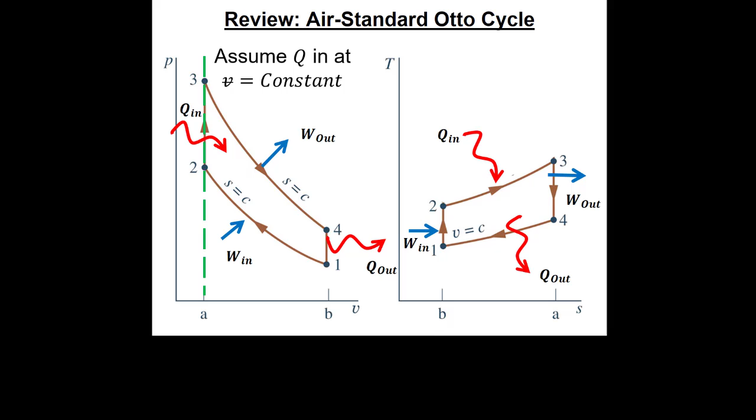So these diesel cycle analyses are a little bit more complicated than Otto cycles. What makes the diesel cycle a diesel cycle is that we assume heat addition happens at constant pressure.

So my PV diagram looks kind of the same, except as I move from 2 to 3, it's no longer a vertical line. Now it's a horizontal line. Maybe you've got alarm bells going off because of that, but if not, we'll see that you will in a second.

So the first process is still an isentropic compression. There's work happening, but no heat transfer. Then 2 to 3 is constant pressure heat addition, so heat's being added, but at constant pressure. This is a horizontal line, which unfortunately means the work is not zero as we add heat.

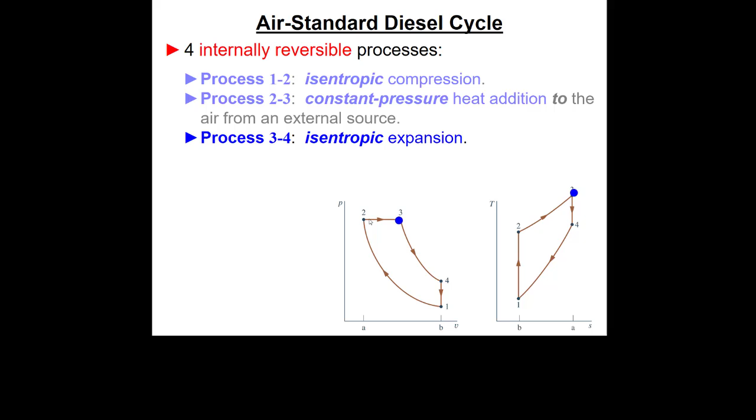Then as we move from 3 to 4, it's an isentropic expansion, again like the Otto cycle. Even though we add heat at constant volume or constant pressure, we assume we remove heat at constant volume. So that's like the Otto cycle too. There's one process that's different here, but it's kind of an important one.

We'll see that it messes things up a little bit because I've got work going in during the process from 1 to 2. But then in the process 2 to 3, not only am I adding heat, but I'm getting work out because my volume is expanding. Remember, anytime the volume gets bigger, work is positive. Then I have constant entropy, or isentropic expansion, so the volume is increasing, so there's work but no heat transfer.

And then I have heat rejection from state 4 to state 1. We'll see that the fact that this is no longer a simple process from 2 to 3 is what makes diesel cycles harder or more complicated than Otto cycles, because this is a horizontal line as we move from 2 to 3.

Sometimes people talk about diesel cycles having a two-stage power stroke, because we're getting work out for two of these processes. As we're adding heat, we get work out, but then even after we stop adding heat, we get work out again.

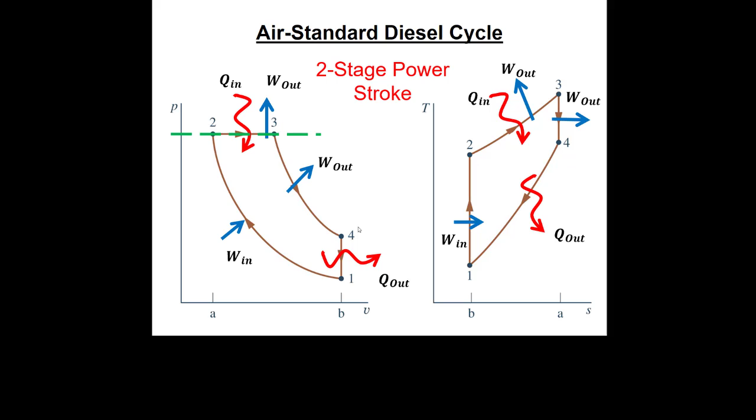So if I try to find the heat out, this is the same analysis we'd do for an Otto cycle. Delta E is Q minus W. But I make some assumptions, so delta U equals Q minus W, but there's no work here. So this one's pretty straightforward: Q from 4 to 1, as I'm rejecting, is U at the end minus U at the beginning.

But what if I wanted the net heat? If I want the net heat, I have to find the heat in, and this is the tricky part. Now this looks like a first law problem I might have asked on the first midterm, because I have this constant pressure process. There's heat and there's work, so I have to find the work separately, which means I need some pressure-volume relationship.

Thankfully here it's nothing too exotic. The pressure is constant, so I pull that out of the integral, and then I have P times the integral of dV, or pressure times the change in specific volume, which gives me the work over the mass, or just the work is pressure times the change in volume.

So now if I want Q from 2 to 3, I have to sub this in for the work. What I did here was isolate for Q 2 to 3. So I have U3 minus U2, but then I've got to bring the work over here, so this becomes plus P2 times V3 minus V2.

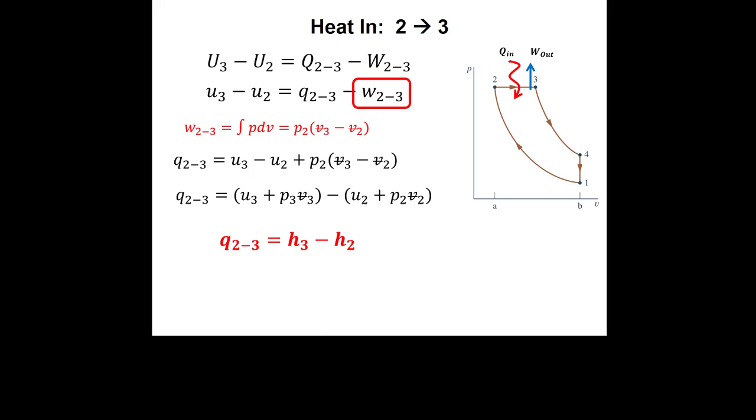But you don't need to remember it because you can just get it from the first law. And we're just using H because it's a mathematical convenience here. It's not an indication that this is now an open system. The system is still closed.

So now, what if I was trying to find the net work? Now I have 3 terms that I have to figure out. This work from 2 to 3 was the integral of PdV, but we already calculated that. That's that constant pressure times V3 minus V2.

The work from 3 to 4, which is the other positive term, if I use the first law here, there's no heat transfer in this particular process. So work is just U at the beginning minus U at the end. Work that goes in is negative, but I still add it to let the first law take care of the signs. Again, I cancel Q, and I get work is U at the beginning, U1, minus U at the end, U2.

Just like I did for net heat, I'm going to collect the terms for heat from 2 to 3 by their state number, not whether it's a U or a PV. And I'm going to get that my net work is H3 minus H2 plus U1 minus U4. Again, this is almost the same answer that we got for the net work for the Otto cycle, but the Otto cycle was U3 minus U2 plus U1 minus U4. So those two states, state 3 and state 2, that are on the horizontal line, they become specific enthalpies, or H's.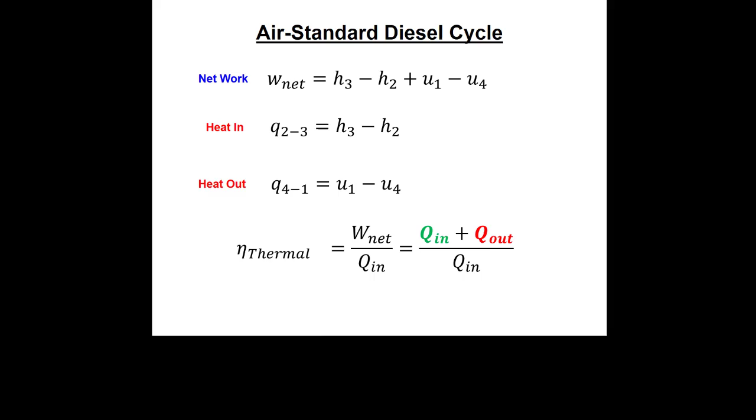If we're trying to get a thermal efficiency, now we've got equations for net work and net heat and heat in, so I can sub that in. And again, I'm going to get equations that end up looking just like the Otto cycle equations, except those two states that are on the horizontal line become specific enthalpies.

So again, you don't have to memorize these final equations, because I'm probably going to ask you separately to work them all out. But it's always nice to know what the shape of the equation should look like when you're trying to work it out.

Now, when we look at a diesel cycle PV diagram, it's a little more complicated than an Otto cycle PV diagram. The Otto cycle, remember, because the heat addition happened at constant volume, there was only two volumes in the whole cycle, the big volume and the little volume. But now there's the big volume, the little volume, and the in-between volume. So instead of just one volume ratio, we're going to have two volume ratios here.

Now, the first volume ratio is the same: it's the compression ratio, the biggest volume in the cycle divided by the smallest volume in the cycle. You should always get a number bigger than 1. As we increase the compression ratio, R, then what happens is we increase the efficiency. I have never used this equation, but it's in the textbook. You can also get efficiency from that equation if you want.

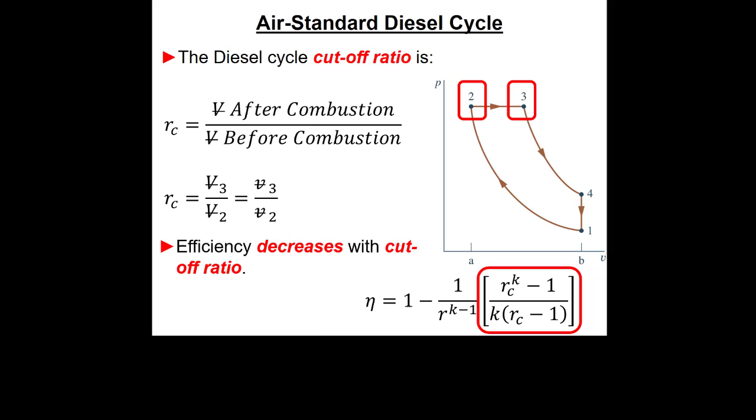So now we're going to do a diesel cycle problem. There's some magic that happens in the diesel cycle problems, which you'll get to see as we fix the states. So the diesel cycle problems are a little trickier. I'm going to do this one with constant specific heat.

So here we have this diesel cycle problem, and it asks us a couple of things. It wants us to find the heat in, the thermal efficiency, and the cutoff ratio. So the first thing I always want to do is get symbolic solutions. It wants Q in, B was thermal efficiency, C was the cutoff ratio.

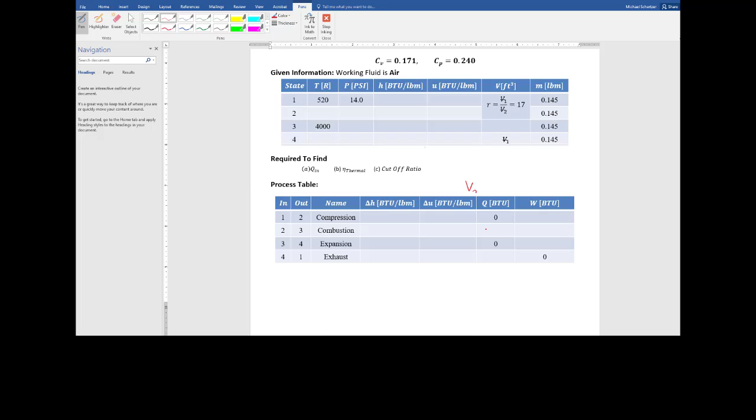Cutoff ratio, I just know by definition—it's going to be the volume. This is the heat addition process. It's V3 over V2, the big volume in the heat addition process divided by the small volume. So this is V3 over V2. So that one I know.

But let's go through the other ones separately. We did this a little bit already in the slides, but I'll do it by hand here too. So Q in, I can get this from the first law, from state 2 to 3, which is my heat addition process. I'm going to assume that the change in kinetic energy is approximately equal to 0, which is approximately equal to the change in potential energy.

Here, what I'm going to get is the mass times specific internal energy at 3 minus specific internal energy at 2 is equal to Q 2-to-3 minus W 2-to-3, or that Q 2-to-3 is equal to M(U3 minus U2) plus W from 2 to 3. Remember, my diesel cycle PV diagram starts at state 1, goes up to state 2, is flat for this process here from 2 to 3.

Unlike all the other processes and all the other internal combustion engines, I need an expression—work is equal to the integral of P dV, and I know that pressure is constant as I move from state 2 to state 3. I'm going to call this equation 1.

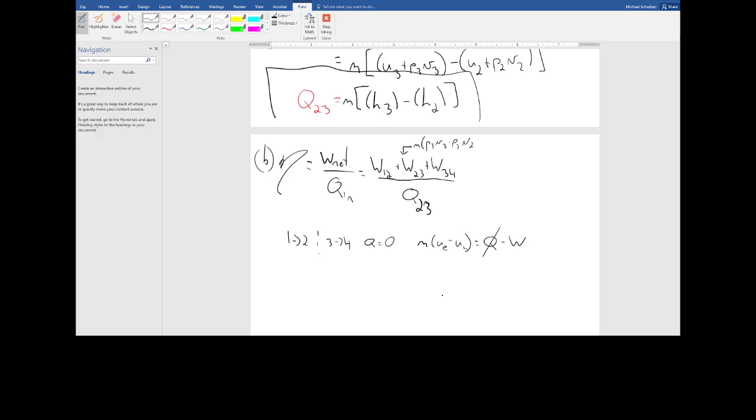For 1 to 2 and 3 to 4, I know that Q is equal to 0. So when I do my first law, I'll still assume no kinetic and potential energy changes. So this is mass times U at the end minus U at the beginning equals Q minus W, but Q is 0. So work is mass times U at the beginning minus U at the end. Work from 1 to 2 is mass times U1 minus U2. And work from 3 to 4 is mass times U3 minus U4. I know I did that quick. Does it make sense?

So now I'm going to put this and this into my thermal efficiency equation. So thermal efficiency equals, on the top, mass times everything: U1 minus U2 plus P3V3 minus P2V2 plus U3 minus U4, all divided by my heat transfer in, which is mass times H3 minus H2.

I don't care what the mass is here because it drops out. But again, I can group in the numerator. I can say U1 minus U2, this is minus U2 and minus P2V2, so this becomes H2, plus U3 plus P3V3 minus U4. Oops. All divided by H3 minus H2.

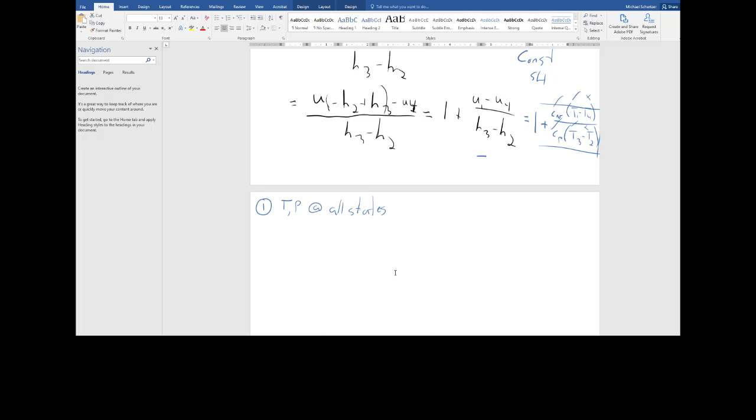So at state 1, we know the temperature. Do we know the pressure? We know the pressure. We don't know the volume, but we do know V1 over V2. Hopefully that's enough.

Now I'm going to move between state 1 and state 2. I ask myself, is this process isentropic? I'm going to ask myself that question every single time I have a cycle where the working fluid is air. So as I go from 1 to 2, there's only work happening, which means it's isentropic. As I go from 2 to 3, there's work and heat. So delta S is equal to 0 from 1 to 2, but 2 to 3, delta S is not equal to 0. Anytime there's heat transfer, it's not isentropic.

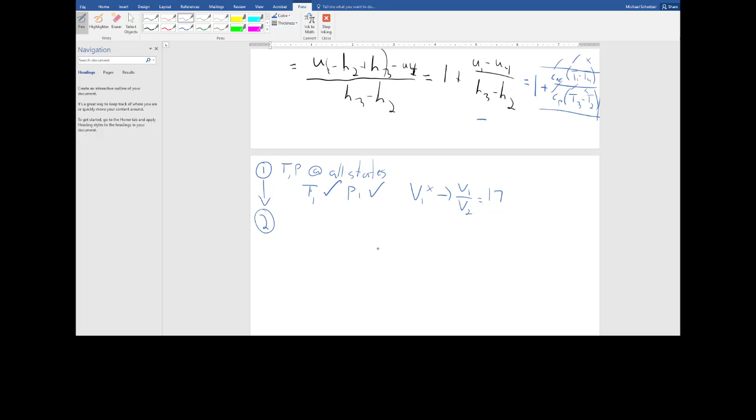Delta S is equal to 0 as I go from 3 to 4. And here I'm rejecting heat, so delta S is not equal to 0. So as I go from 1 to 2, I can use an isentropic relationship. I love it when I can use isentropic relationships because those are the key to finding how to fix these states when the working fluid is air. I need to know where my isentropic relationships are.

Now I'm just trying to find my equation sheet again. So ideal gas, yep. Isentropic, yep. But is it constant or variable specific heat? When it was variable specific heat, I'm looking for VRs or PRs. But now because it's constant specific heat, I'm looking for something with K in the exponent. And because I know the volume ratios, I'm looking for this one. So T2 over T1 is equal to, this is a little tricky because it's inverted, V1 over V2 to the power of K minus 1.

So here, T2 over T1 is equal to V2 over V1 to the power of K minus 1. No, V1 over V2 because that's inverted. See, I just told you, be careful for that, right? Because maybe it's a thing that I mess up sometimes. Right? So usually if 2's on top here, 2's on top here. But the thing is you got the equation sheet, so use the equation sheet.

So now, K is equal to Cp over Cv. For air, this is usually 1.4. I don't know if it's given. If it's not given, I think maybe it's table A-20 or something where you look it up. But here they gave me Cp and Cv, so I can just divide them, or you'll find that it's usually about 1.4. It'll change a little bit depending on the temperature that you look it up in. But this is R, right? 17.

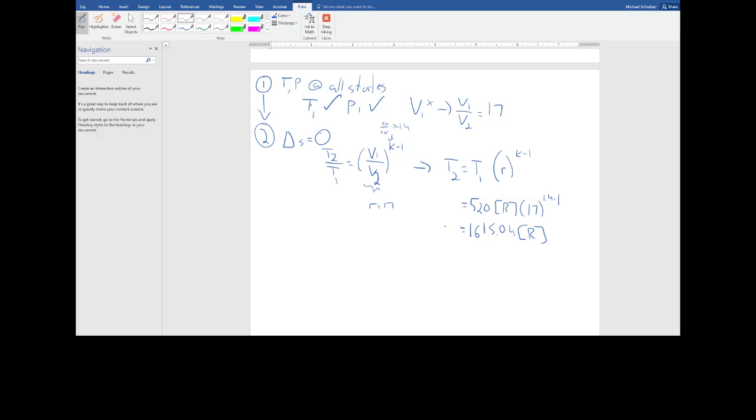Temperatures are good because temperatures are what I need to do the first law, right? Because remember, I'm either going to have a Cv or a Cp times delta T. It's usually not enough, though. But let's say I did think it was enough. Because in my final equations, in the symbolic solutions I have, I'm only going to have a T2. So I think I don't need P2 based just on those equations.

So now, as I go from state 2 to state 3, I ask, is delta S equal to 0? From 2 to 3, this is Q in and work out. So delta S is not equal to 0. It means I can't use some expression that has K in the exponent. But I can still use the ideal gas law. I could also still use the first law. I already did that to find things like Q 2 to 3 and W 2 to 3.

The ideal gas law tells me P2 V2 over T2 is equal to mR, but it's a closed system, so mass is constant. And we assume there are no chemical reactions, so R is constant, the gas doesn't change. So this becomes P3 V3 over T3. And you know what the cool thing is? This is a diesel cycle, which means constant pressure from 2 to 3 as we add heat. So P2 is equal to P3. So here I didn't know P2, but I didn't necessarily need to, because it just cancels out here.

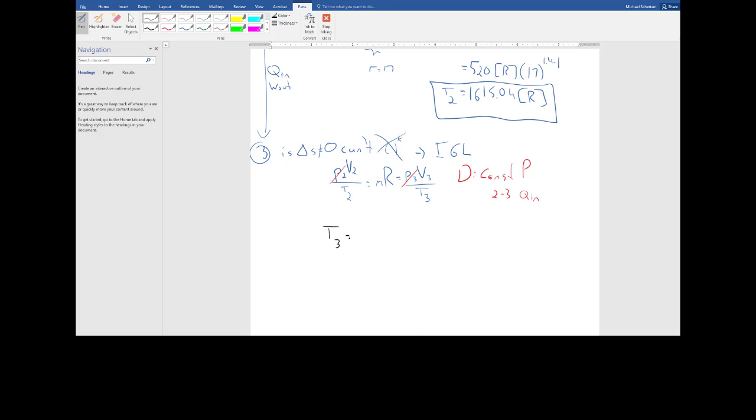So here what I find is I'm looking for T3, and it's going to be T2 times V3 over V2.

But the thing is, I know T3 already, right? T3 was given, and you might say, why did I even do this? Because they told me T3. But there's still a reason we did this. T3 was known, so I'm not going to use this equation to find T3.

But I didn't know what V3 over V2 was, right? This is my cutoff ratio. So anytime you have a diesel problem, if you're trying to find V3 over V2, you know that it's going to be T3 over T2.

So here, once I found T2, I think that this was T3, 4,000. I know I just looked. 4,000. So this is 4,000 divided by 1615.04, right? They're both in Rankine. That's going to be 2.48. That's my answer to part C.

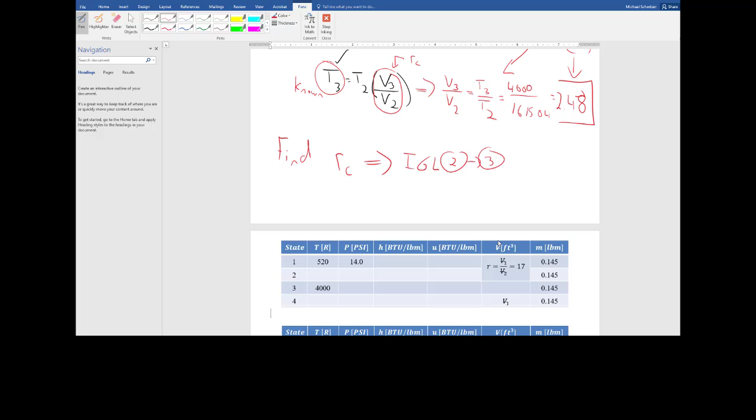Now, I know we're getting late here, but you want to pay attention for this next part, because if people mess up diesel cycle problems, it's because they have a problem going from state 3 to state 4.

So from 3 to 4, air is still the working fluid, so I ask, is delta S equal to 0? The answer is yes. The nice thing about these diesel cycle problems is they'll usually give you 2 of the temperatures right off the bat, or they could give you a temperature and maybe a compression ratio or a cutoff ratio from 2 to 3 or something, and then you could find the other temperature. But getting T4 is tricky, right?

So again, because this is true, I have 2 choices. I can use some equation that's VR over VR, but I'm not going to do that because that's variable specific heat. Or I get some equation that's temperature over temperature equal to volume over volume to the K minus 1. In this case, I'm trying to find T4, and I'm moving from T3 because 3 to 4 is isentropic. So this becomes V3 over V4.

The problem is I don't know V3 over V4, and I don't think there's a way for me to calculate it. It's funny because I know the ratio of V1 to V2, and I know the ratio of V3 to V4 or V2 to V3. So if I knew one of those volumes, I could calculate the rest, like if it gave me the diameter or something. But they didn't.

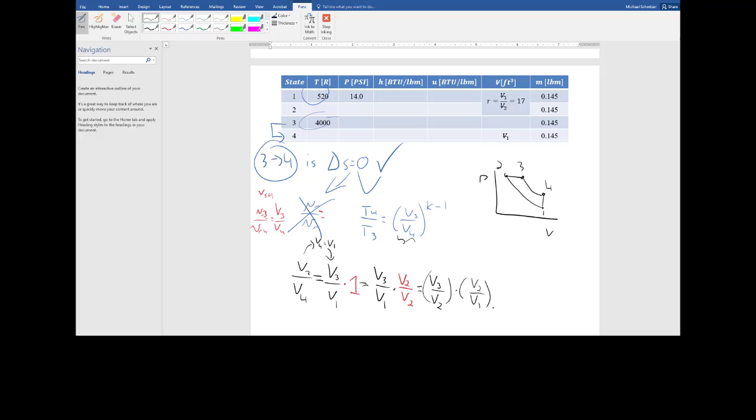None of that's cheating in math, right? I multiply by 1, and then I use the fact that the order of operations doesn't matter where I put the multiplied parts by, right? 1 times 2 is the same as 2 times 1, right? I forget if that's commutative or whatever, right? There's a special math word for that.

Now, V3 over V2 is my cutoff ratio. V1 divided by V2 is R, right? So V2 over V1, this is 1 over R. So this means that this is equal to RC over R. You see how that happened?

So there's 2 things that we needed to know here. That V4 was equal to V1, and then I multiply the whole thing by 1, but the one that I multiply by is V2 over V2. And that means I can change V3 over V4 to RC over R.

So now T4 over T3 is equal to RC over R to the power of K minus 1. Or T4, which is what I'd really like to find, is equal to T3 times RC, which was something like 2.5, I think. 2.48 divided by 17. K is 1.4.

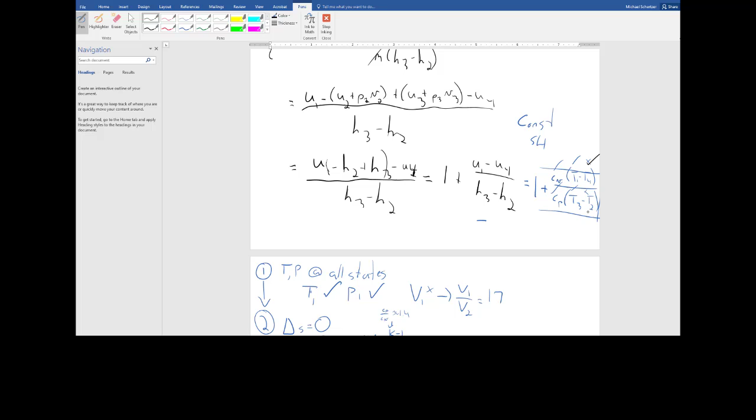So now, if you want the numerical answers to all these things, you can go through and look at them, right? But now, when I look at my symbolic solutions here, I knew CP and CV. Now I know T4 and T1. And then when I look over here, I knew T3 and T2. And I found RC by going through and fixing the states, running the ideal gas law between state 2 and state 3.

So that's generally how we do diesel cycle problems. In a way, it's nice because there's only 4 states. And usually they'll give me 2 of the temperatures, or they have to tell me the cutoff ratio. Things that are tricky here is I got to remember, as I go from 1 to 2, delta S is equal to 0. As I go from 3 to 4, delta S is equal to 0. Here, I got to use the ideal gas law.

RC is equal to the temperature over the temperature, right? So T3 over T2. And over here, I got to remember that V3 over V4 is the same thing as V3 over V2 times V2 over V1, which is equal to RC over R.

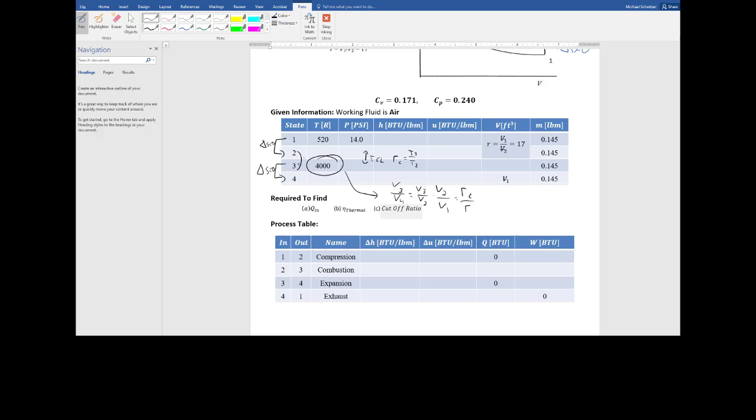Right? So diesel's definitely trickier. It's trickier because as I go from 2 to 3, then there's heat and there's work. So that means I'm going to get H2s and H3s, right? But still U1s and U4s. So the first law stuff is tougher, and the state fixing is a little tougher too. So diesel is the harder of the 2 problems, but I think once you do a couple of these, just like the 4-component Rankine cycle, there's not too much you can do to change these problems around because they're all mostly the same.